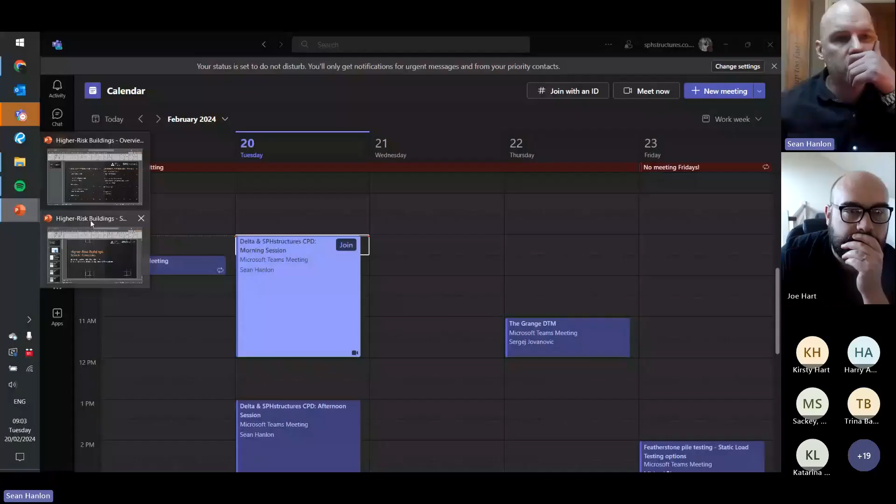So we split the day into two sessions. We have a morning session and an afternoon session. We did this because when we first broached the subject of doing this, and we threw it out on LinkedIn back in January, there were two distinct groups. People wanted to dig into the risk assessment stuff and didn't necessarily need the morning session. So the morning session was aimed at upskilling and knowledge sharing, whereas some of the more experienced engineers might already know the stuff we're going to cover in the morning. So that's where we've come with two sessions.

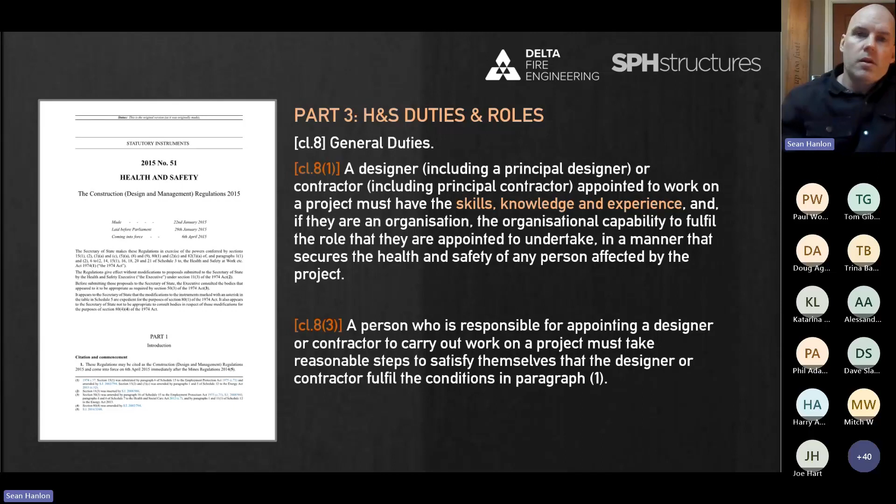Now, I think it's unfair if I sit here and preach about competency without at least suggesting how we do it or how we approach it. So we send out our competency documents, both personal and organisational, as part of each fee proposal that we send out. So when we get a new job in, we look at it and then we go back to the client and say, right, we have looked at your job. This is what we think. Here's the fee for it. And here's our competency that says, this is what we think, this is why we think it, and this is the fee to take it on.

Even if we don't get the job, at least we turn around and say, look, whoever you go to is fine, not a problem, but make sure you're asking for their competency. They should be giving you this information as well. And then this is your responsibility. These are our responsibilities. And at least that way, even if we don't get the job, we've done our best effort. We're pointing in the right direction and we're getting the client to ask the right questions, even if they're not part of the industry.

So in terms of organisational competency, for us, it's predominantly skills and knowledge. Our experience, you can see through the website, our LinkedIn, our Instagram even, and because there's only two of us at SPH Structures, our own personal experience portfolios feed into the SPH competency as well. So we kind of link it in with that.

And then in terms of when we adopt it for the organisational, we're looking at, okay, what is the Engineering Council? Where is their hierarchy? How does that play? What does it take to be chartered? Who's chartered? Is that important? Who are we chartered with? What standards, regulations, design guides apply to us as an organisation? How do we follow them?

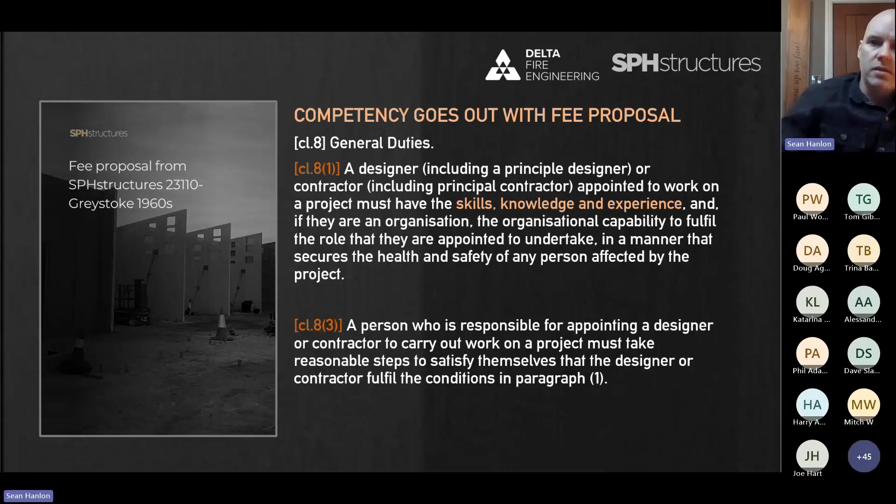And so I'm going to say industry should be doing this. I don't see many examples of this, but the Building Safety Act is now bringing in competency with a vengeance, so to speak. We're all seeing the impact on building surveyors and what they're having to jump through right now, but it does impact designers and contractors as well.

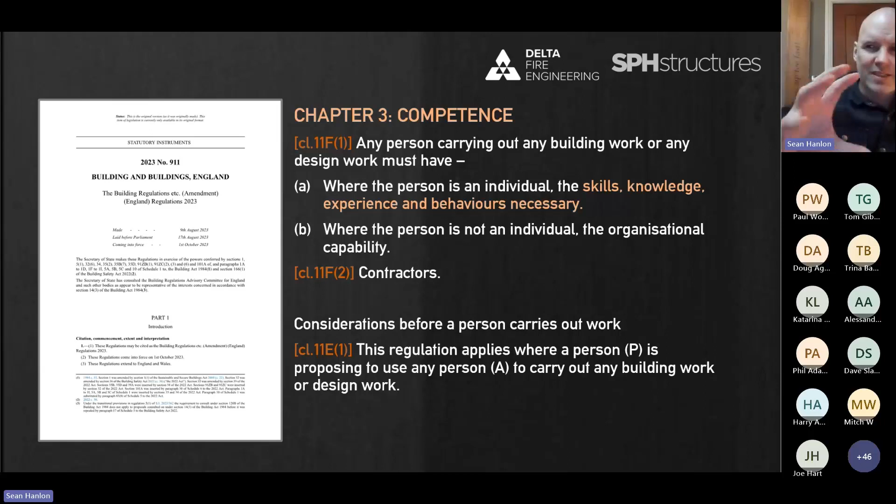Impacts us through secondary legislation. So the changes to the building regulations, which came in on the 1st of October 2023, they've got a whole chapter on competence. And these guys are basically reiterating what the CDM regs already say, with one exception. So clause 11F part 1: any person carrying out any building work or any design work must have, where the person is an individual, skills, knowledge, experience and behaviour necessary. Where the person is not an individual, the organisational capability. Part 2 of that clause is the same but for contractors. So again, that's echoing what the CDM regs already say, with the addition of behaviour.

Now, behaviour, I'm taking to mean following a code of conduct from your institute. So speaking on behalf of, say, the Institution of Structural Engineers, I know within the code of conduct there are clauses in there that say you should be behaving appropriately. You can't be calling out engineers for doing bad work. You have to act appropriately. So I think if you're a member of an institute, you could probably get your behaviours competency ticked via that way. I know RIBA have been training their guys, additional training on the behaviour aspect for this recently, but I don't know how that would look from, say, a contractor or M&E or the fire guys, or what you guys do, or how you're going to negate this additional requirement.

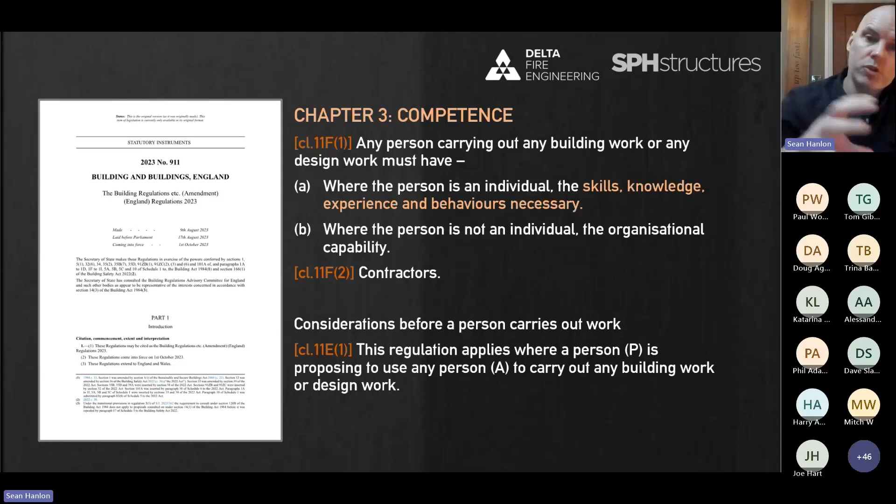And then if you backtrack a little bit into clause 11E of the regs, this regulation applies where a person P is proposing to use any person A to carry out any building work or design work. So that's just reiterating that the client needs to make sure people they're appointing are competent. This bit's new. And this is the bit that I want to discuss later on at the end of play today as well, because I think it opens up a whole can of worms. And this is where designers especially, and anybody else, might get caught out.

Clause 3: the requirements in paragraphs 1 and 2 that we've just spoken about do not apply to an individual T who is in training to fulfil those requirements. The person who asked T to carry out any building work, or as the case may be, any design work, must ensure T is adequately supervised when carrying out the work. Okay, what's in training? So at what point do you start being in training? Is it when you attain chartership? What if you've never attained chartership? What is adequate supervision? Is it one-to-one supervision? Is it one chartered engineer supervising a team of 6 guys?

How does this work where you have 4 or 5 engineers in training around you in a bigger firm, for instance? Should trainees be working on higher risk buildings? Does this raise questions about the ability to check a job? So should it only be competent engineers checking each other's work? And what about if you go between cross consultancies? You're doing Cat 3 checks. How do clients ensure the right people are on the right job? I think this opens up a can of worms, and I think it's going to hit the guys who are competent but not necessarily chartered, because I think chartership will help you in this instance, that you've already demonstrated. For instance, in my personal CPD, my personal competency stuff, I've already shown that I've reached a level in terms of materials, laws, contracts, basic design work, detailed design work, construction appreciation, all these kind of bits. If those guys haven't done the portfolio for that, how's it going to affect those?

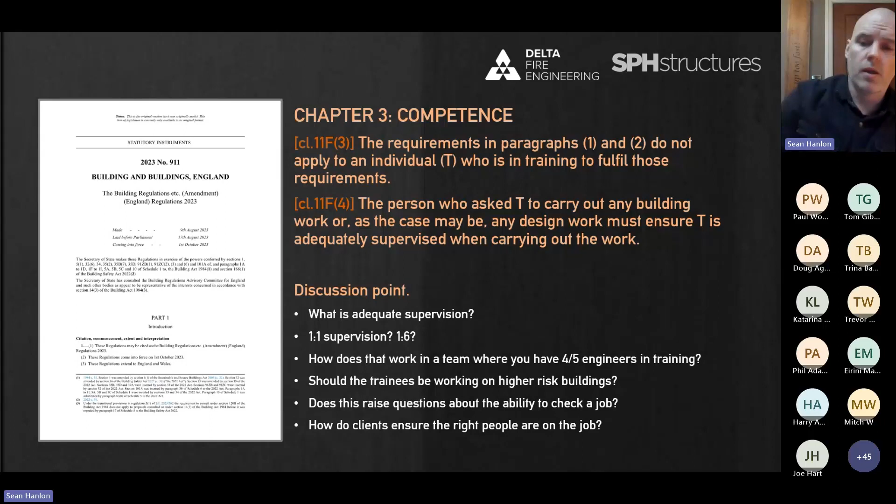So again, I touched on the non-chartered competent engineers and how they're going to achieve this. So who's responsible for this assessment? Is it the clients? Is it the Engineering Council? I know that the Institution of Civil Engineers and the Institution of Structural Engineers, ICE and the IStructE, are combining to produce a joint register. So if you're on that register, you are seen as competent to be able to work on higher risk buildings. I don't know if Fire, M&E and everybody else would be doing a register similar to that. And I don't know if clients are going to demand that as part of working with them on high

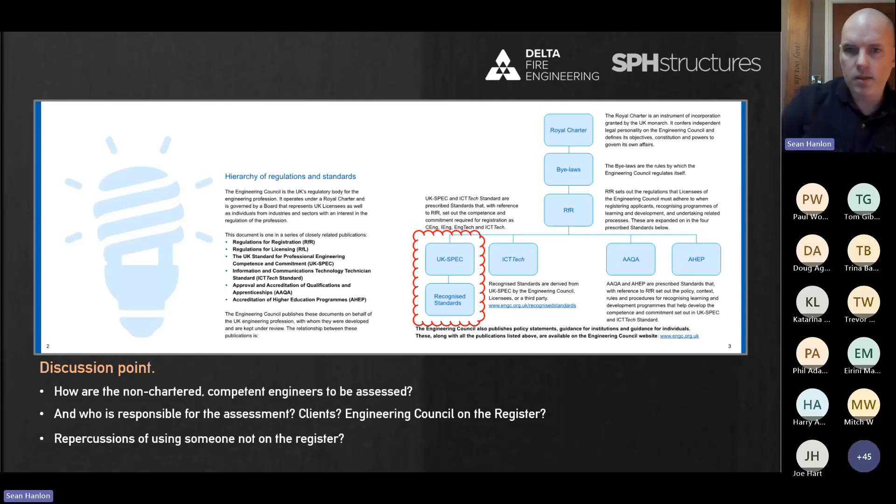risk buildings. Now, I also don't know what the repercussions are of using someone not on the register. I don't know if that's a risk to the client and they take that chance. So maybe the non-chartered competent engineers will be hoping for that clause as well. But I don't know how hard that's going to be enforced. So I think this is opening up a can of worms at the minute, and we need to be careful about how we tread through here.

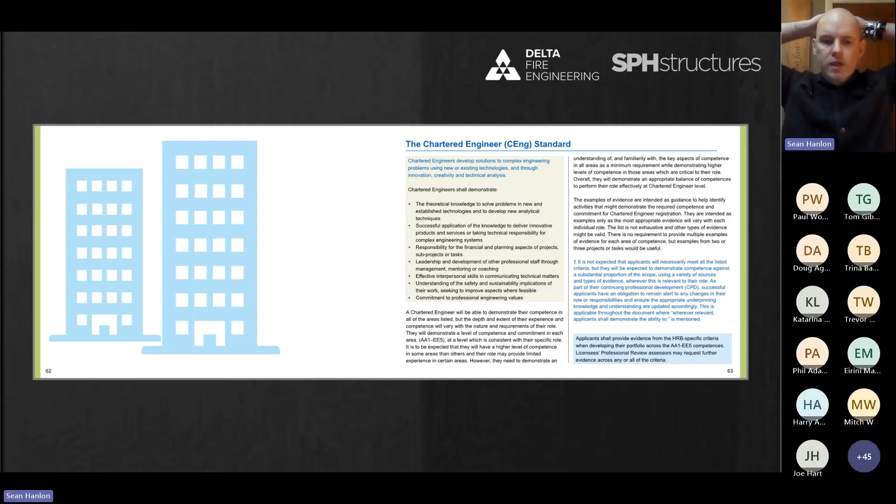Now, when you open the UK-SPEC, there's 3 points that are talking through it. You have the incorporated engineer, the technician, and the chartered engineer. We're going to focus on the chartered engineer today, but each has their own requirements of what we should be demonstrating for the additional work. Now, when you turn the page, you've got 4 sections basically, and these run all the way through the book. So your competence, which on the left here is AA, knowledge and understanding. There will be certain points, normally 1 or 2 points per area. So in this case it's 1 point: maintain, extend, and develop a sound theoretical approach.

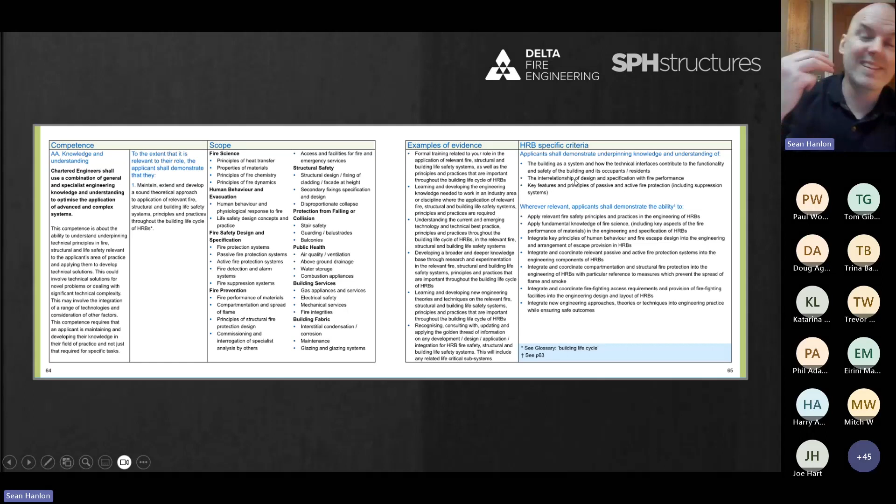A rough scope. And this is every engineer. So this is structural, fire, M&E. We all need an appreciation, a knowledge and understanding of fire science, structural safety, fire prevention, public health, building fabric, building services. And then the HRB specific criteria over here, there's 3 points that we definitely have to demonstrate. There's another 7 points if they apply to you as well. So that's 10 points that we've got to demonstrate that we have competence in. So when you go through the rest of the UK-SPEC, there's 5 areas: knowledge and understanding AA, BB, CC, DD, EE.

When I read this, I think AA is the technical aspects. That's the upskilling. This is the knowledge swap. This is why we're here today. I've got to learn about fire. I've got to learn about structure. And this is what we're learning. And then we go away and we demonstrate this. You might not get everything you need to learn today, but at least it points you in the right direction, gives you an idea of how to pad out your competency, and then you can go from there. B, C, D, and E, I think that's stuff you should already be doing anyway. It's not necessarily technical, and if you're already doing it, it's not too bad. If you're not already doing it, there's quite a lot of work involved.

Now, I was talking to another engineer on this, because I was going to go, right, we're going to focus on AA, and then only talk about AA. But another engineer read this, and his interpretation of it was: is it not similar to the principal designer role, in that we still do our work, but then those who have demonstrated their competency go on the register and they basically sign off and check our work?

And I was like, I don't think so, because it defeats the point. How does the client know if you're competent to do the job in the first place? And I think if you're going that route, it defeats the point of trying to upskill the industry, and it just creates a bespoke checking group within the industry. And I don't think that's the point. So I'm going to elaborate on these points a little bit more, because it has been interpreted that way.

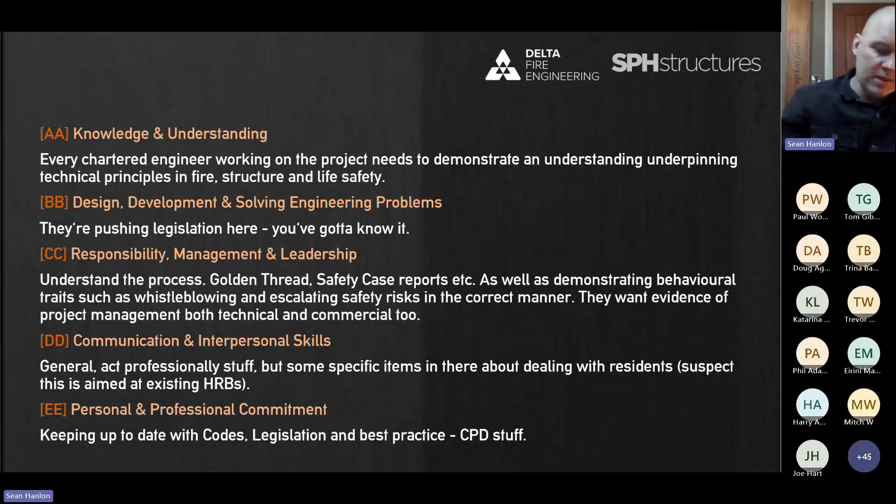I would say that's your CROSS, your Confidential Reporting on Structural Safety, and knowing how to report critical safety aspects, like immediate safety aspects, to the HSE. How do you raise them? If you see something wrong, how do you shut down a site, for instance? They want evidence of project management, both technical and commercial, here too.

Communication and interpersonal skills: general act professionally stuff, but some specific items in there about dealing with residents. I suspect that's aimed at existing HRBs, although they don't specifically state it. And then your personal and professional commitment. You're basically keeping up to date with the codes, legislation, best practice, CPD stuff.

Understand root causes that affect the structure or fire safety of a building. I would say that's your visual condition survey, or if you're doing a new build, it's understanding where the main risks are and what could go wrong. Identify barriers in place. It could be access and all that kind of stuff. And then assess major accident structural safety hazards.

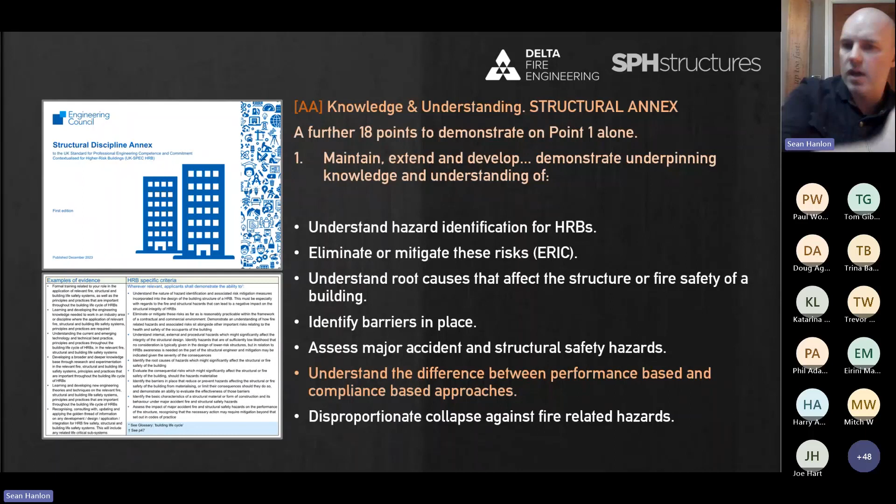This one I've highlighted. Understand the difference between performance-based and compliance-based approaches. They don't come in here and say there's a difference between how you should be approaching new buildings and existing buildings other than this clause. This is the only thing I've seen that alludes to the fact that you have to take one approach to new buildings and one approach to existing buildings. Compliance-based is code compliance. I call it prescriptive. You follow the codes, you do what it says, you get a nice shiny building at the end of it.

Performance-based is you've got to look at how the existing building's working. Some existing buildings don't work to code. They don't even work to their old codes, let alone the new codes. So where are you drawing the line on safety? How are you assessing that building? A lot of engineers make the mistake of trying to shoehorn existing buildings into compliance with new regs, and they don't work. I think that's where you're seeing a lot of the news bulletins at the minute with evacuations around higher risk buildings around the country, because people are panicking and trying to assess old buildings to new codes. And then obviously we've got to look at disproportionate collapse against fire-related hazards as well.

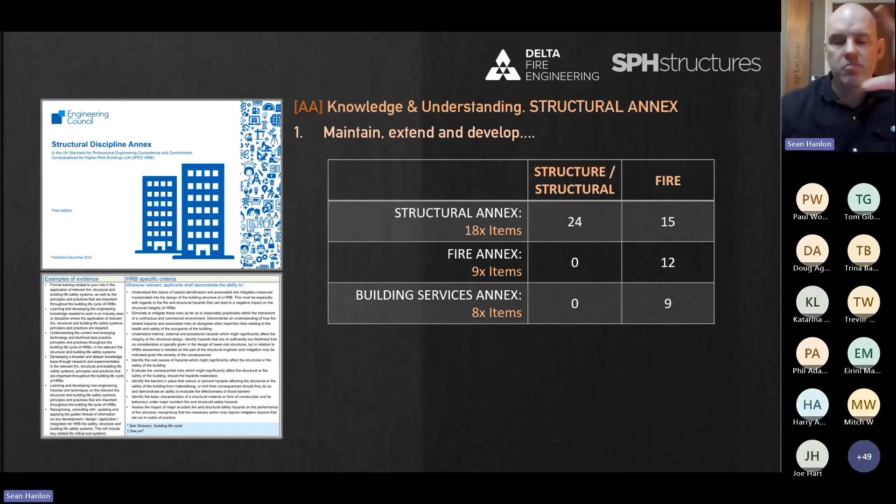Now, on behalf of all the structural engineers out there, I'm having a quick moan, because in the national annexes we have 18 additional points to do. Fire have 9, building services have 8 additional points. Structure or structural are mentioned 24 times within our annex, but it's not repeated through the others. Considering we've got 18 points to pick up, a lot more than the other annexes, why isn't appreciation of structure mentioned in the other annexes, especially for knowledge and understanding? That just seems out of proportion to me. I think that needs changing going forward. But to be honest, I think the UK spec was quite good. I didn't think it really needed these annexes. It's essentially creating a bit more work for us as well.

So going into BB, back into the UK spec, now that you're aware of the annexes and how they feed in as well, BB is the design, development and solving problems. There's 2 points within this that we need to cover. Point 1, which is down here, is just retyped up here: take an active role in the identification and definition of project requirements, problems, opportunities throughout the building lifecycle of HRBs.

That's your specs. That's you doing the job, going through design, development, and everything else. I think you're doing this anyway. I think this is just your job. Most engineers should be doing this as a regular day-to-day occurrence anyway. Now, the scope of what they require here, especially for point 1, they're asking for you to know construction legislation, related guidance.

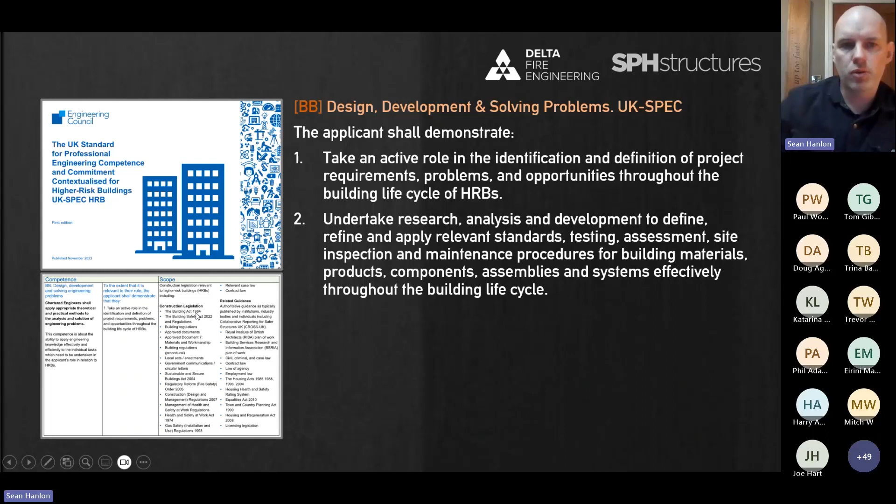Excuse me. Now, in terms of the construction legislation, they want you to know: do you know what the Building Act of 1984 is? Do you know what the Building Safety Act of 2022 is? Do you understand the relationship between acts and regulations? Do you know which building regulations, which approved documents are applicable?

And then in related guidance, they want to know if you know the plan of work, so the RIBA plan of work, Building Services plan of work. I would throw in the IStructE plan of work there as well, because it's different from the RIBA, and it adds an additional work stage between stages 4 and 5 for the structural engineers. So if I'm an architect, if I'm a fire engineer, if I'm building services, do you appreciate what we do there extra before we get on site?

And then for scope 2, they're asking for British and international standards, good practice specifications. I would say that's all your national specifications. So in structure, we have national specifications for timber, steel, concrete, piles and embedded retaining walls, all stuff that we can reference as good practice throughout the industry. And then your maintenance requirements, which you should be raising as part of your CDM regs anyway.

Now, I would say you should know this anyway. People know this. This is how you do your job. It's just demonstrating it. That's the problem. Now, again, as I said at the start, it'd be remiss for me to sit here and preach about competency if I'm not going to share how we do it. So on the left, we have the basis of structural design. This is Eurocode BS EN 1990 or EC0, as it's commonly referred to. And we use this as a checking document.

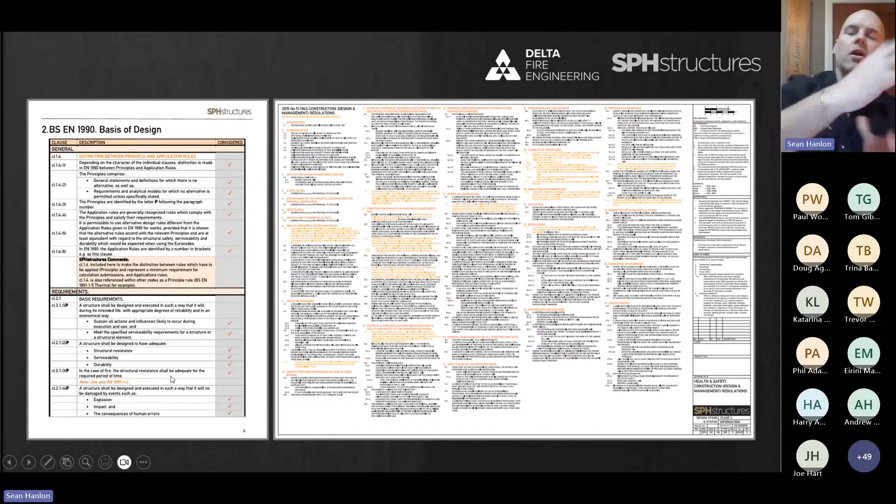So there's a big problem with our industry at the minute with over-reliance on software. People churn through, hit a button, churn numbers, computer says yes, off you go. The problem is not all the principal rules are picked up in those software packages. So if I'm picking up drawings as part of a check, especially if I just get a roll of calculations printed out, I'm there like, okay, have you read the codes? Do you really know what's going in? Have you addressed this principal rule? What about this principle? And when you start looking at all that, it should build your design. It should feed into the design anyway.

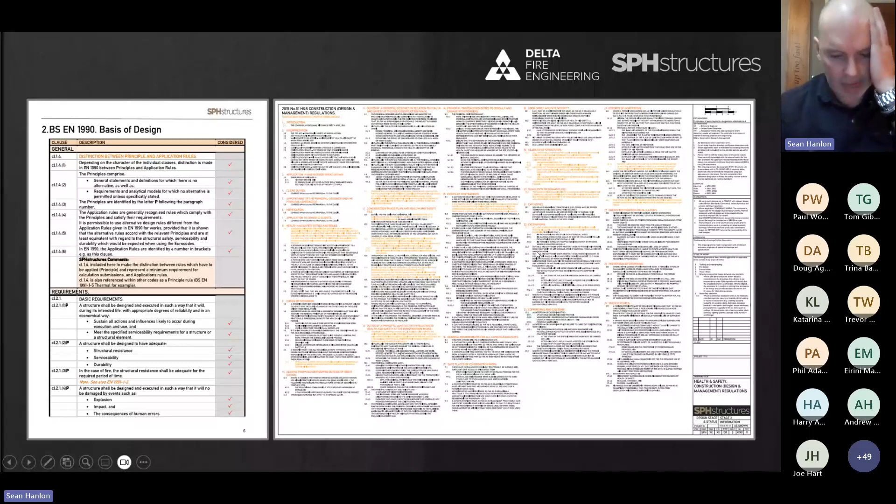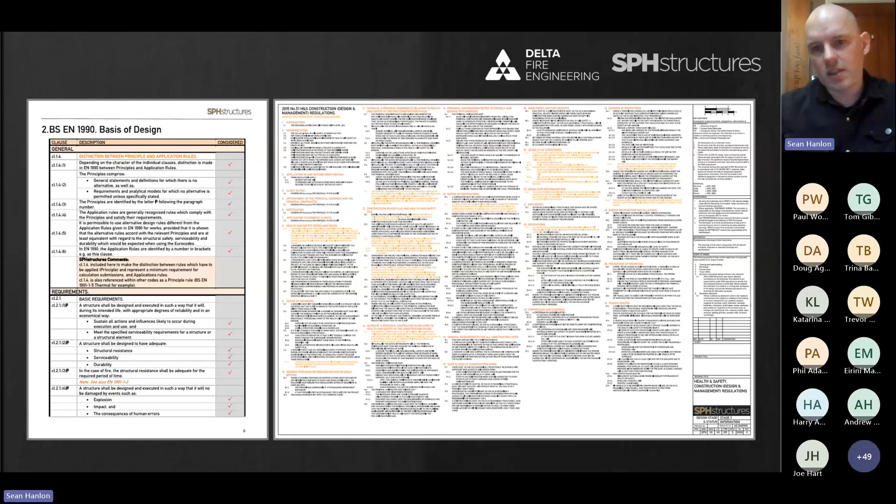And then in terms of the regulations, this is CDM regs. We made a conscious decision a while back that basically anything that we get asked from site or within the design team, especially from site, goes onto our drawings that we issue at site. And one of the biggest arguments we always had, especially with the smaller contractors, was stability of structures, responsibility, temporary works, and contractor design portions, such as steel connection design, timber connection design, and all those elements. They're taken from the national specifications.

But what we did was we typed up the CDM regs. Now this is just 2 pages. This is the first page. And we highlighted bits that are either applicable to ourselves or applicable to contractors. So we say, right, this is our responsibility. Our responsibility as designers is to highlight any design, construction, and maintenance risks in the project. And we do that, and on the second page, we show how we do that. So they're included in our GAs, they're included in our details.

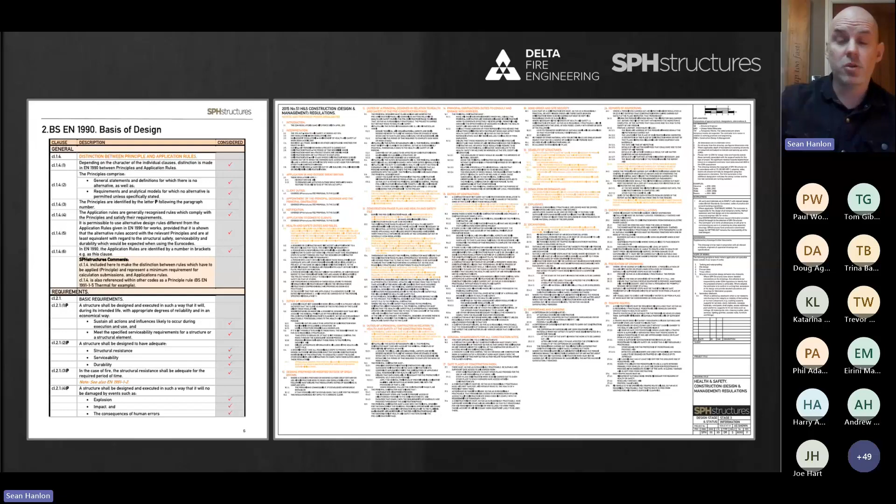And half the time, most of the questions that come back are because they hadn't looked at the drawings. And we found this is a really powerful tool in terms of, no, we're covered here. This is where it says, and it's no longer our opinion, code says this, regs say this. And then we review this. I'd say we probably reread it every 3 to 6 months, just to refresh it, because you can't remember everything, but I know the gist of it. So that's how we demonstrate compliance with legislation, codes, and everything else.

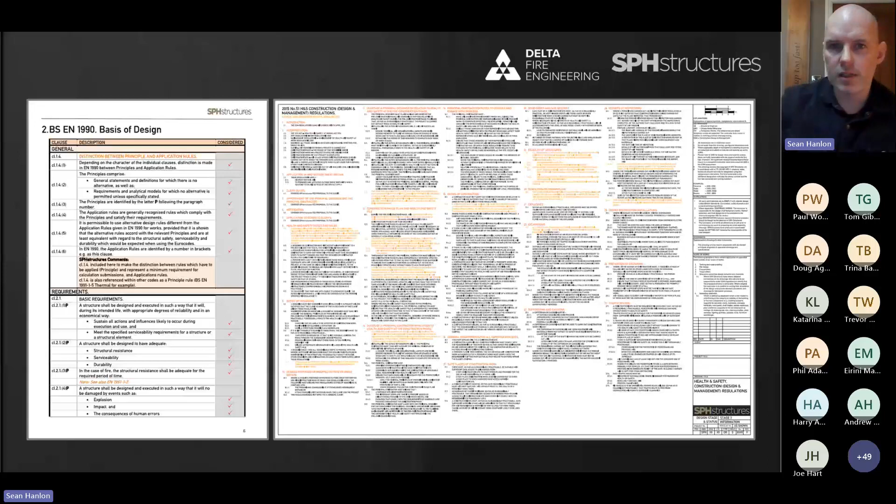Moving on to CC, you're looking at the responsibility management and leadership, the UK spec. So this is understanding the process, golden thread, safety case reports, and the like. The scope for it explains duties of engineering in relation to HRBs, roles and responsibilities of the key duty holders.

I would say I'm having a chat with a lot of clients at the minute, so they fully understand their duties and their responsibilities, and that comes down to communication as well, which we're going to come on to in the other points. And then integrate understanding through life management and maintenance. Again, I think that's really important for existing buildings, and it's almost the first question we're asking when we're appointed on HRBs. And then we've highlighted this bit, which is challenge others where duties are not being met.

I've highlighted it because it almost contradicts code of conduct, especially ours. So we're told that we almost can't call out or challenge. You can challenge engineers, but you can't call them out. And I think that's where the difference is. And just the last point before I move on, competence needs building safety managers. I know it's great. Okay, so it's just reiterating competence throughout everybody who you appoint on the job.

But going back to challenge others where duties are not being met, I think there's, okay, this. RIBA Job Book. This is what architects work to. So if an architect asks us to do more design work or asks us to do certain bits that are typically outside of our scope, I can say, no, that's not our role. It's not within our scope because you haven't issued a responsibility matrix, which you should have done at stage 2. If it's on there, great. We could have priced it. We could have gone through that and we could have worked with that.

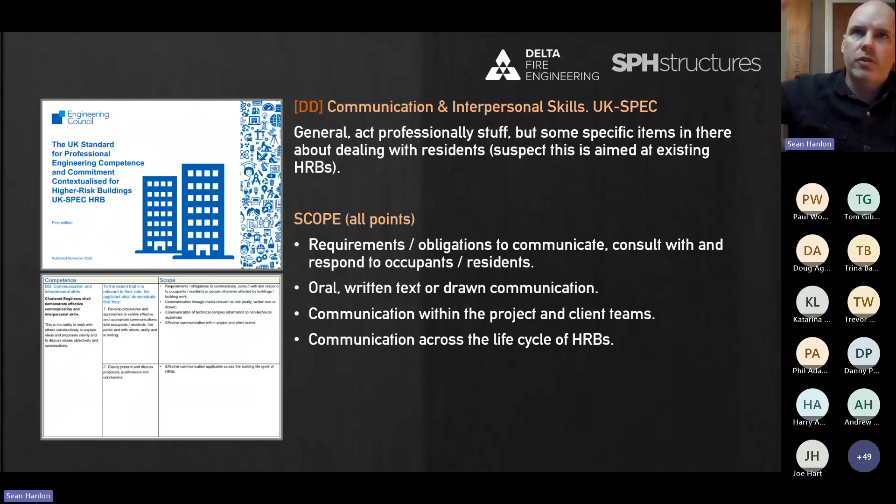I think you've got to be really careful, especially us as structural engineers, to go around and go, your building's at risk of disproportionate collapse, everybody out. Don't get me wrong, if the building is at risk of disproportionate collapse, everybody out, we do it. But it's a big responsibility there, especially when you're dealing with 40, 50, 60, 70, 80 units of people, all their families and where they're going to go.

How you do this, I would say it's more aimed at existing buildings, but how you do that with your clients, whether you do it through a series of webinars or online calls or in person, don't know. I think you need to plan that out before you start engaging with the residents, though. So they're clear about the communication lines, and then you can structure it to see where you go through and raise questions that way. We all do have a duty of care to the residents.

That needs to be reiterated, and then you have to adhere to codes of conduct, which IFE, I'm sure they have their own. M&E, I'm sure they have their own, same as us. And then the legislation guidance that applies to HRBs, there are specific regulations out there. There's 6, for instance, that apply to higher-risk buildings. 3 are more procedural in terms of how to register buildings, how to manage the buildings and everything else. And then 3 of them are quite technical. So it's worth being aware of those.

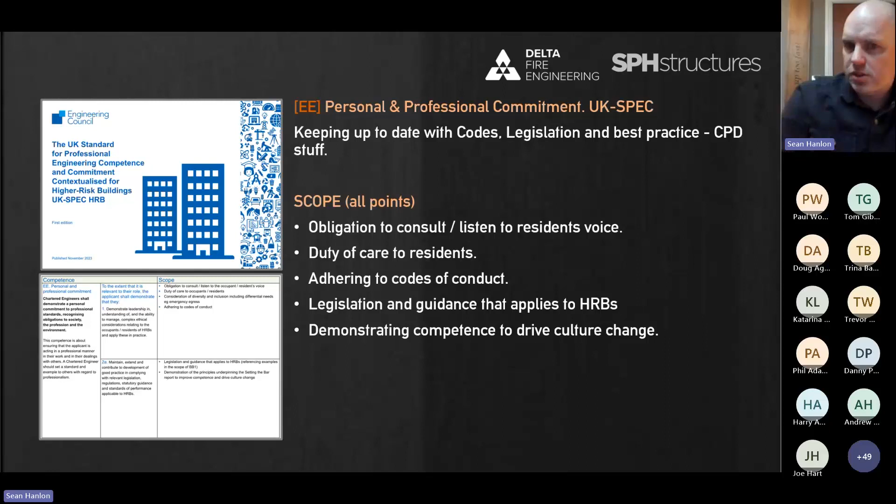And then you've got to demonstrate competence to drive cultural change, which I hope we're doing through this and trying to push the industry in the right direction, sharing info. And then all that is fed back into your competency documents, your personal and your organizational competency. And then our intention is to add AA as an additional page onto our competency documents. So we're already doing B, C, D, and E, and it's seen as building that. So that's where we're from, and this is why we're here today, and this is what we're going to learn from. So I think that should cover it.

Brill. Thank you, Sean. Hope you can hear me again now. Are we back? Yeah. Fantastic. Really good run through. There's been a good stream of chat in the meeting chat, and I've pulled out some questions to give to you, Sean, if that's all right. If anyone has any questions, pop them in the chat as well, and I'll pitch them to him. I think everyone else is muted, aren't they, Sean? So I don't think we can bring people in, but I'll relay questions as they come through. Cool. I was going to plan on doing it for the discussion at the end, but we can play about it now if you want. I think if you right click on whoever it is, more actions, I don't know. I'll figure it out. If anybody wants to come in live, we'll figure it out. Otherwise, I've written down a bunch of questions, Sean, from the chat, so we'll start on those.

Right, okay, so Andrew, starting with a question, and it's one that I really like, because it's one I'm asking myself in my business at the moment about the point you made, Sean, about legal requirements and should we make clients aware of them. So how much of a duty do we have as consultants to tell our clients what their legal responsibility is? And I've added this bit on, do we have a defence if they've not asked us to do something and that's a duty they have, but we've not made them aware of it? Where does that sit currently? I guess it's an opinion-based question, but what do you think on that?

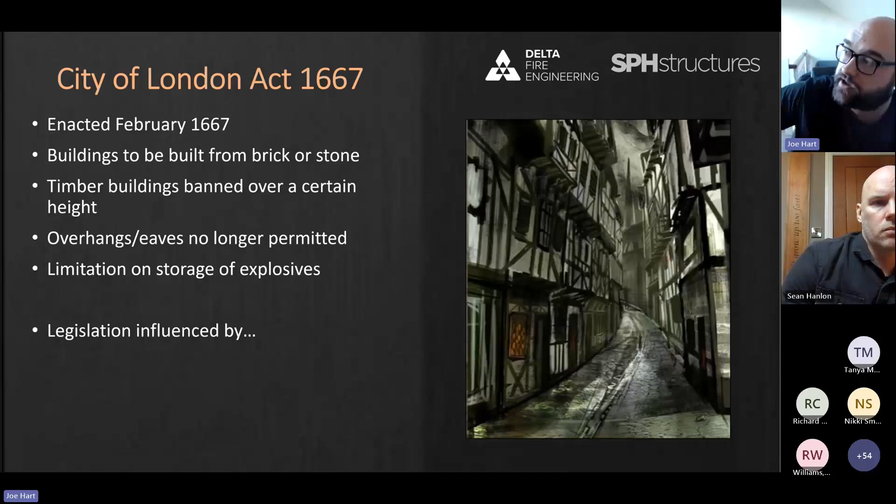And in this case, they were a bit quicker in the 17th century at drafting legislation. Go back 6 months and you get the Great Fire of London. And you can draw the parallels between these two things. The Great Fire of London itself was a mass conflagration, an urban conflagration, so a fire that spread between multiple premises. In fact, it destroyed 3/4 of the ancient city. It spread rapidly between tightly packed buildings that were constructed of timber.

So 6 months later, in this case, we get a piece of legislation that says, okay, because that was an issue, we identify that now as being a root cause. We legislate that out. The Rebuilding the City of London Act says we can no longer do that. And fast forward to more modern times, some of us remember these incidents I'm going to talk about next. We see exactly the same again. If we go back to 1989, we get the subsurface regulations. They apply to subsurface railway stations.

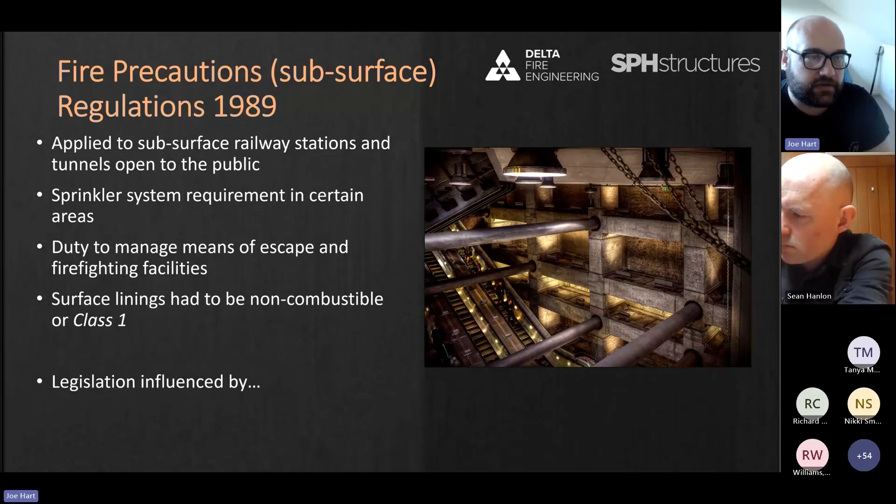And in fact, any tunnel that's open to the public, even pedestrian tunnels, interestingly. We have a requirement to put sprinklers in, which is not something we would have done typically, because sprinklers in underground areas are difficult in terms of pumping water out post-incident and the potential runoffs. A duty to manage means of escape and firefighting facilities in these environments, and surface linings particularly legislated under secondary legislation that they must meet a certain standard.

And again, if we apply my 18-month rule, we go back and we get the King's Cross fire of 1987. Now, I talk about root cause analysis, and I teach that a lot at the university. If you look at the things that are legislated and you look at the incident, you find a direct parallel. So in the King's Cross fire, again, I'm not presenting this as a case study, it's just to highlight a point. It was the surface linings that contributed particularly to flashover occurring in the ticket hall.

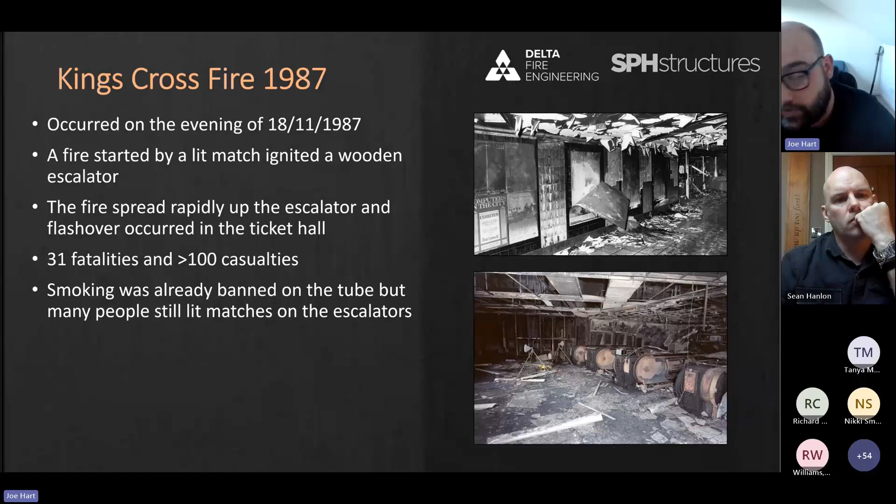These are photographs from the actual incident. So you can see that the surface linings had contributed in terms of propagation along the surface and also combustion of those elements as well. Even the posters in the top right image had ignited. The King's Cross fire itself resulted in 31 fatalities. What we often find is an incident that has a high proportion of fatalities, injuries, or undue loss of property or business or operational continuity. We'll get some investigation into it and often find that we change our rules or guidance.

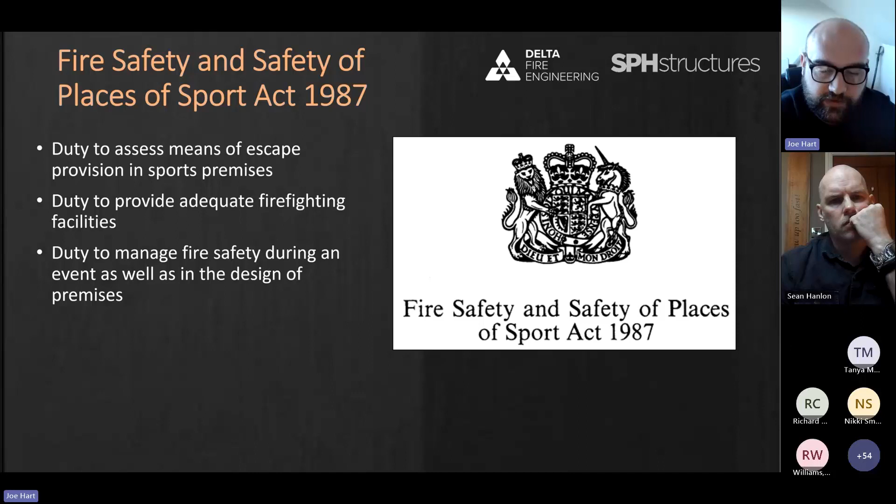Another example, I think slightly earlier, the Fire Safety and Safety of Places of Sport Act 1987. So this brought in an obligation. I was actually teaching a course on this yesterday afternoon at the university. So we had a duty to assess means of escape provision in sports premises. Specifically, what it brings in is a requirement, a legal duty to manage sporting events during the event, not just in the design of the stadia. So a regulation that says once we've designed it and it's occupied, we have to manage it in a particular way. And again, with our 18-month rule, we go back and we find a really significant fire.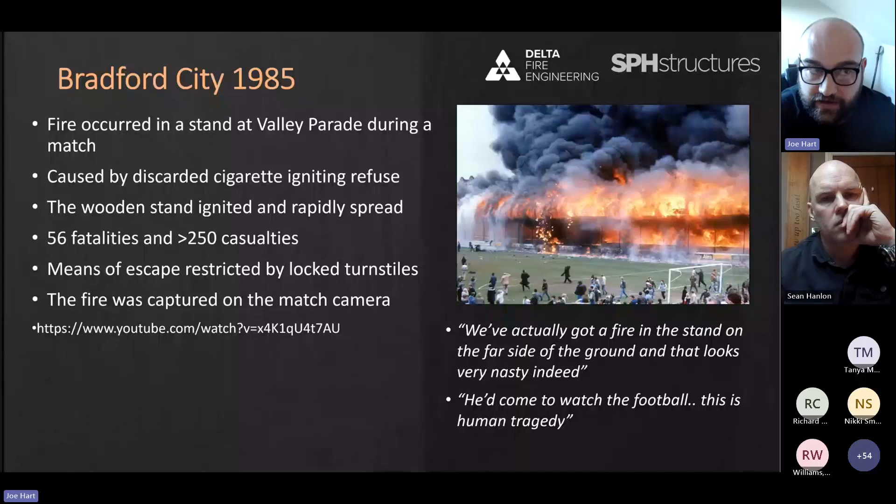And when you look at the fatalities, 56 fatalities in this case, a large proportion of them were as a result of the management during the game rather than the design. What actually happened, and if you read the report into it, a major contributory factor to the number of fatalities was the locking of turnstiles at half-time or after the game had started, because there was an issue with people coming in without tickets. So the duty for management is something I talk about a lot throughout today, as well as duty of design. And again, this fits with our 18-month rule from incident through to legislation or guidance.

The last point on this before I come to where we are currently in industry in terms of fire. We see this also in fire. We look retrospectively at data over time, statistics over time. It's a very analytical field, I find. Certainly when we're writing guidance and writing legislation, we look for major incidents and trends. And anyone who's seen my lectures before will be familiar with these next couple of slides, but it's an example I like because it highlights the point really well. And it brings in some of our instances of fire, so some of our risk that we're looking at.

If we look at the graph on screen, we've got the number of fatalities in fires from 1981 up to almost the present day, 2020. And this graph shows the proportion of fatalities in dwelling fires versus other fires, and the Grenfell Tower fire is in there as a standalone data point as well. But what we see, and I'm not a data analyst, I do this for the purposes of engineering, but to my untrained eye, I can see that the graph is going down. So from 1981, we had around 750 fatalities per year, and up to almost the present day, what are we, 250.

So we've reduced down there to a third of where it was. And this is the sort of data that's used in the drafting of our guidance and legislation and in our risk-based approaches to say, well, this is a positive trend. We've seen a decrease, whilst interestingly saying that the proportion of dwelling fire fatalities is broadly the same across. You would say perhaps 80%, 85% of fatalities occur in dwellings rather than other fires, but generally a downward trend.

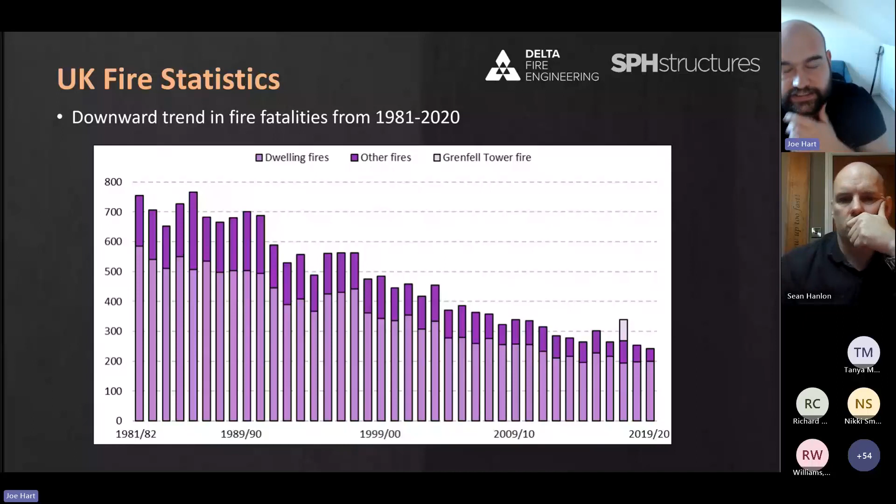And related into this as well is things to do with funding for fire services and funding for general fire precautions work, and whether we need to draft guidance, etc. So you look at this and see a positive trend.

But over time, this is a slightly wider version of the same graph. You see 1981, we had 750 fatalities, slightly more in here because it goes beyond the fire, so forget about the blue at the top. You see that actually that 1981 statistic was just the top of a bell curve. And actually from the 1950s up to the 1980s, there had been this huge increase in fatalities in the UK.

And it's this sort of work that's really intrinsic to fire. When we're talking not just about designing a school or writing a fire strategy or doing something, but on the wider perspective, which is where we're working here in the Building Safety Act, we're looking at wider trends in fire engineering. It's where I spend a lot of my time. We look at the wider industry, and it's this sort of analysis that's really useful.

If we look at what's happened from 1981 to 2020-ish, slightly different data set, downward trend. But actually there is just an upward trend from the 1950s. And this is a really interesting area of fire safety for me, this analysis of how effective we're being. Because what happened in the 1950s, we know why this happened.

If we look at the colour bars, we can see, again, proportions of the data. So the burns didn't really change, so fatalities as a result of direct heat exposure. But what's driving the trend is overcome by gas, smoke and toxic fumes. It was toxicity that was driving this increase in fatalities from 1950s up to 1980s.

And when I teach this in the classroom, I say, does anyone know what this is? And I can't do that today, but generally this is quite well accepted and understood within fire, not so much outside of, but it is an interesting little statistic. What it was that was driving this change in fatalities was, in fact, the types of materials we had in buildings, internal to buildings, not in the structure itself.

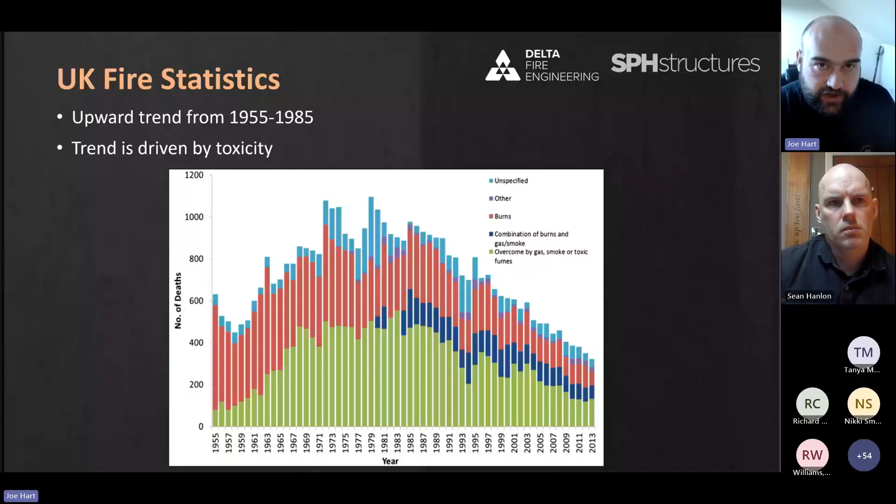So from the 1950s onwards, we started to use more synthetic materials, foam, mattresses, polyurethane, different materials we were putting into people's homes. And that drove over a 30-year period or 25-year period, a huge increase in toxicity. And what we did, bringing it to where we are now in terms of legislation and guidance, is in 1980, this was identified and we started to test upholstered furniture. We brought in the upholstered furniture safety regulations.

If you go now to get rid of a sofa at a charity shop, you can't do it without one of those labels on it. You have to demonstrate it's been tested to the standards that were brought in as a result of that wider industry change. So nowadays we put fire labels on things to say that post 1980 we've tested it accordingly, and if we can't demonstrate we have that, it can't be used in buildings or we can't market that product.

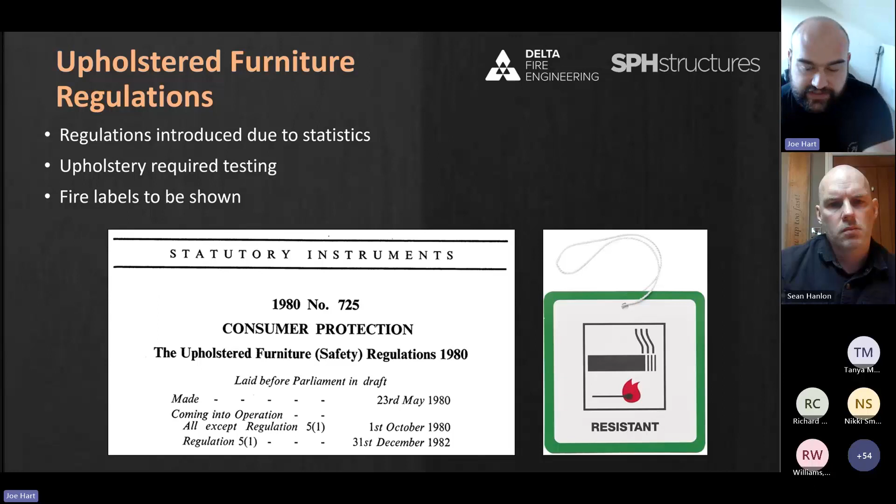And again, just an interesting statistic to pull out, we actually have an updated version in 1988 of that particular regulation. And if you read it, it says there is a specific exemption for something that's pre-1950, which is the date at which we saw this increase in toxicity occur.

So that's a bit of a brief run through to start with some history of fire. The key salient point I want to make there, before I come on to the next one, is that fire safety is beyond what we see in buildings. It's not simply the kind of detector you see in your home or the extinguisher you see when you go down the pub or you walk into a shop and you see a fire exit sign.

There are wider kind of industry trends that we look at and also wider consequences of real incidents. We spend a lot of time, certainly I spend a lot of time reading into case studies, looking at fires that are happening now when they make the news.

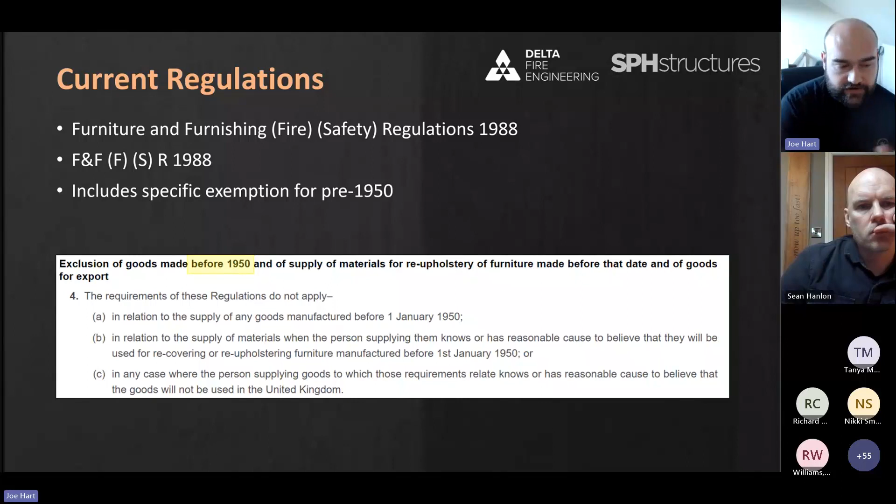I research in a lot of detail if I can. I look into the design of the building and what perhaps led to it, and also historic. There's a huge element of our industry that is looking historically at what's occurred. And where we get to today, of course, we've looked at the competency already with Sean this morning. Throughout today, we're going to get a little bit more.

The Building Safety Act is no different. We know, hopefully, the Building Safety Act has come in following the fire at Grenfell Tower. It was enacted, and now all the secondary legislation we have and continue to get is as a direct result of that incident and the trends that have occurred over time. That trend doesn't have to be plotted on a graph. It can be anecdotal, cultural shifts. Everything we've seen in the industry over the past, well, decades, frankly, is now seeking to be undone by the Building Safety Act and change the regimes that we have.

The Building Safety Act itself is changing the way that buildings are designed, reviewed and managed for fire safety. It's a really interesting point. It's not simply the design. There was a question this morning that I didn't quite get to about, are we looking at the design of buildings or existing buildings? And one thing with the Building Safety Act is it transcends both. It has changed the regime we have both for new builds and also existing buildings that we're reviewing. Other things it has done is establish the Building Safety Regulator, changed our regulatory regime.

And I suppose one of the salient points we've touched on so far is that it has sharpened focus on competency. So those working in fire safety, the Hackitt review, when we read, and the Raising the Bar reports and Setting the Bar reports, very, very much focused on who's making decisions, what are their competency, who should be making decisions, and how do we document all those things with the golden thread of information.

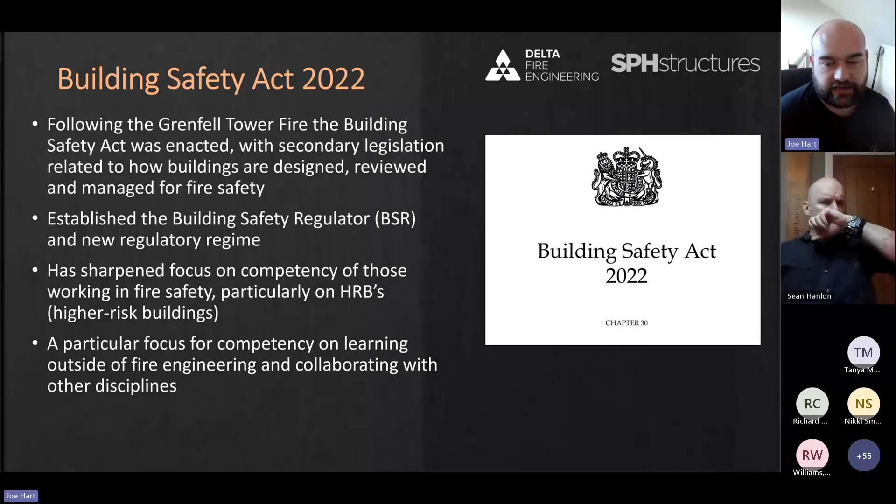So one other focus, and this is why Sean and I are here doing this. Really, the reason we're doing this and the reason it's free and we're giving it out to everyone is this is Sean and I swapping notes. But we think that the fact we need to swap notes, being in the positions that we're at, suggests other people want to do the same as well. And it's great that so many people have dialed in to do the same. This is a note swap exercise. This is just us sharing what we know so we can all learn from each other. Because particular focus, post-Building Safety Act and post-Grenfell certainly, is about learning from other disciplines and sharing what we know and learning from everyone else around, collaborating on projects and collaborating in wider industry.

So to come on to what we actually do then in terms of fire engineering, this is just finalising the point there about the history of regs. So legislation is often influenced by our historic events. That's not unique to fire. It's so prevalent in fire though. Go back 18 months from the regulation and find the fire. It's a game that you can play. It holds so well with everything that we find. Any incident unprecedented in terms of scale, damage or loss of life will often draw scrutiny of the regulations. How was it that this thing was allowed to be constructed? How was it that people were put at that undue risk, and why did that incident occur? That will often bring in change in legislation.

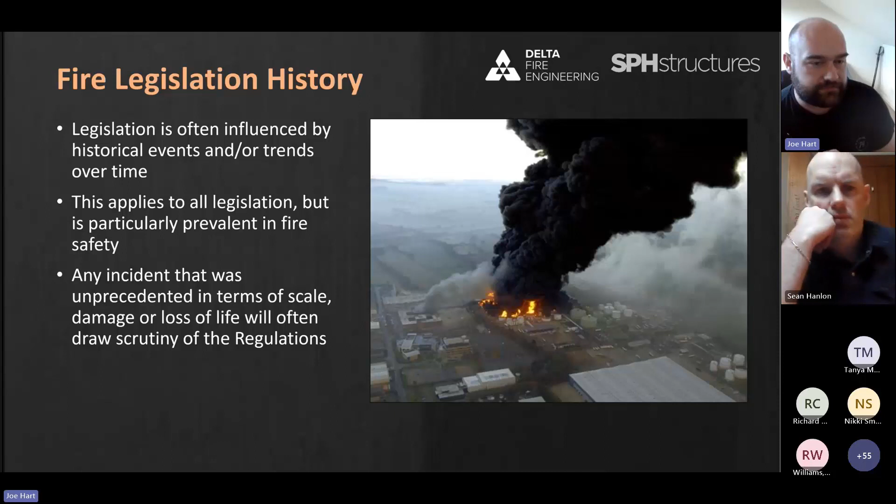So bringing us to where we are, I wrote these slides after having read Sean's, and I quite liked the way that it was presented, simply going through what we do day to day that I take for granted in terms of what rules am I bound by and what do I look at when I'm designing those particular buildings. So we are familiar, I presume, with the building regulations, the vast majority of us. Perhaps not, though. I know I've got some folks dialed in who want to learn about fire engineering who work in other fire industries.

There's a point I want to make very briefly that actually I've very recently, in fact, stopped calling it the fire industry, because something that I've learned now that I'm in my position holding multiple roles, I've realized that actually I work in lots of different fire industries. I work in the fire engineering industry, academic, which is itself an industry, but I'm also in the fire risk assessment industry, the fire construction industry. Each of those are very different. They operate in different ways.

And I've only really realized that literally in the last 6 weeks. I've had a bit of a light bulb moment that I now refer to the fire sector. So within the fire sector, we have all of these disciplines working together and multiple industries. The fire engineering industry here, we're looking principally at our building regulations. So in terms of functional requirements, we have 5. Part B. Part A, of course, is you guys over in structure. We're Part B. We're right on your coattails in Schedule 1.

We have 5 functional requirements, and they work the exact same as any of the rest of our functional building regs. It doesn't tell us exactly what we need to do. It gives us a function. It gives us a definition of what we need to achieve, and it's for us to design. There is a slight difference we have now with Regulation 7, of course. We now have a legal duty for cladding of high-rise buildings. But broadly, for what we're talking about at this stage for an introduction, it is the functional requirements B1 through B5.

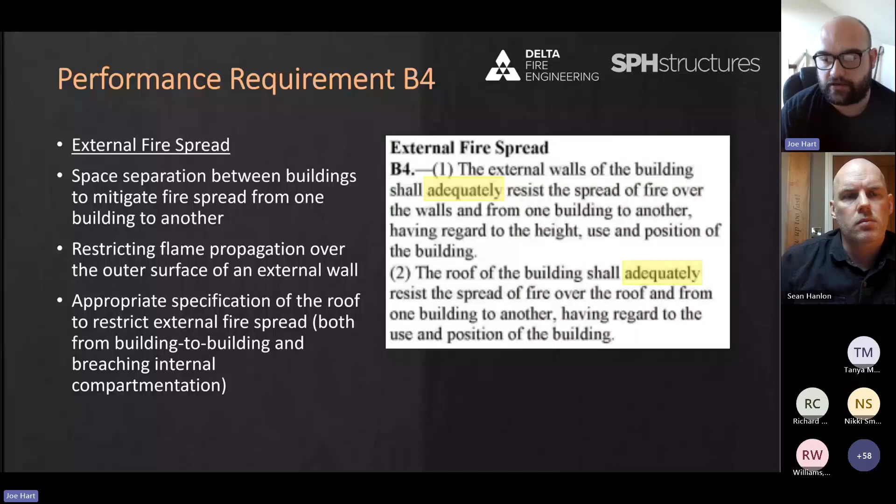First of all, it's a fire breaking out from the building, spreading over the roof and breaking back in. But secondly, it's an external fire source hitting the roof and breaking down into the building as well. Multifaceted, the external fire spread for both walls and roofs. Big part of any fire strategy we're looking at, certainly these days.

And then finally, performance requirement B5. So the access and the facilities for the fire service. We have the legal duty, we have the functional requirement in two parts again. The building should be designed and constructed to provide reasonable facilities to assist firefighters in the protection of life. And reasonable provision should be made within the site of the building to enable fire appliances to gain access.

So things we might be putting into a building, we would be looking at access to the building. We look at the access roads. What's the width of those roads? Can you get a fire appliance down there? If you're driving a fire appliance down, is it just a typical fire tender? Is it a water carrier? Is it a high reach appliance? Is it a special appliance? Is it just a pump? Is there sufficient holding capacity, waiting capacity for multiple appliances?

If we had a make pumps 10, we've got 10 fire appliances on site, is there sufficient space for them to be? Do we have access beyond where the building site is, but where's the nearest fire hydrant? Is it within 90 meters of the site? Do we have access to water? We look far beyond the building itself when we consider regulation B5.

As well as the reasonable facilities once we've accessed sites, so we're writing the operational firefighting strategy to say once we get up to the building, what do we do once we get there? Do we commit firefighters to the building? We always design on the basis of we've put sufficient things in place that we could effect firefighting operations, because what we're doing under B5 Part 1 is providing reasonable facilities to assist firefighters.

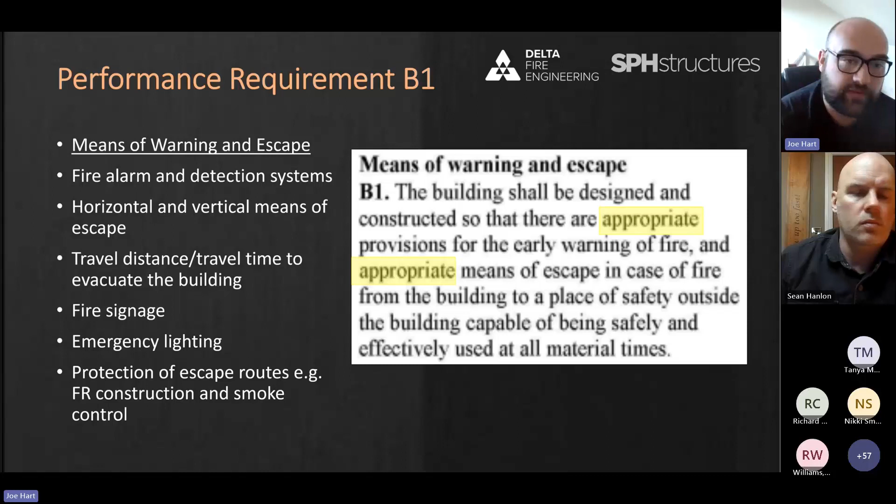All of these, if I skim back, I'm going to take the opportunity to just go back to them super quick and highlight them again. Huge consideration both in existing and new builds. So in a new build, we have guidance for each of these things. We have our British standards, as we'd have in any discipline, that tell us minimum category of alarm, how far apart detectors should be. Similarly, for internal fire spread linings, we've got guidance on what type of room, the risk of that room, and what we should be building in.

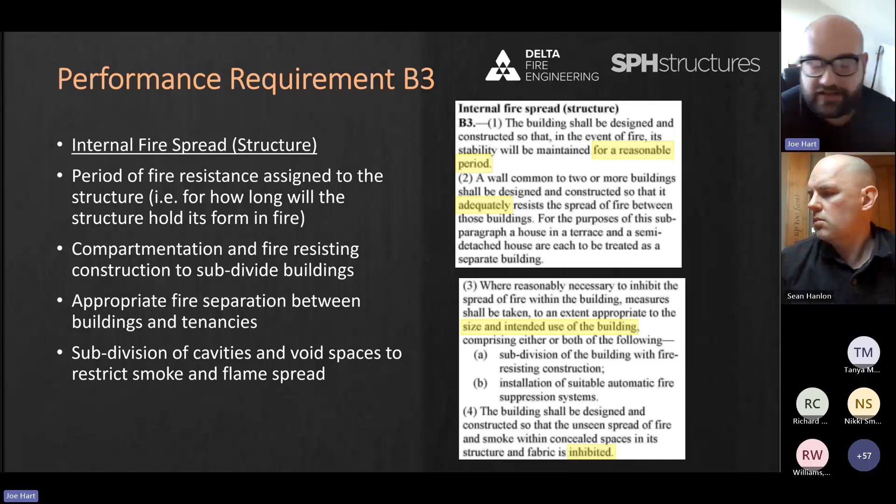We can calculate the required element of structure, period of fire resistance, based on the reasonable worst case fire size. We can look to guidance again for a new build and spray intumescent paint on the beams if we choose to. External fire spread, we can classify what cladding we need, and we can decide what we're going to put in the building for fire service, and we can widen roads while we're building it.

Big challenge for us, and certainly in what Sean and I look at very frequently, is in existing buildings. We're looking at what is currently in place for these things. We're benchmarking against guidance, but we're looking at reasonably, do we have appropriate means of escape? Would the fire service be able to, again, reasonably use facilities in the event of operational firefighting, and do they have reasonable provision in the site to access and move around?

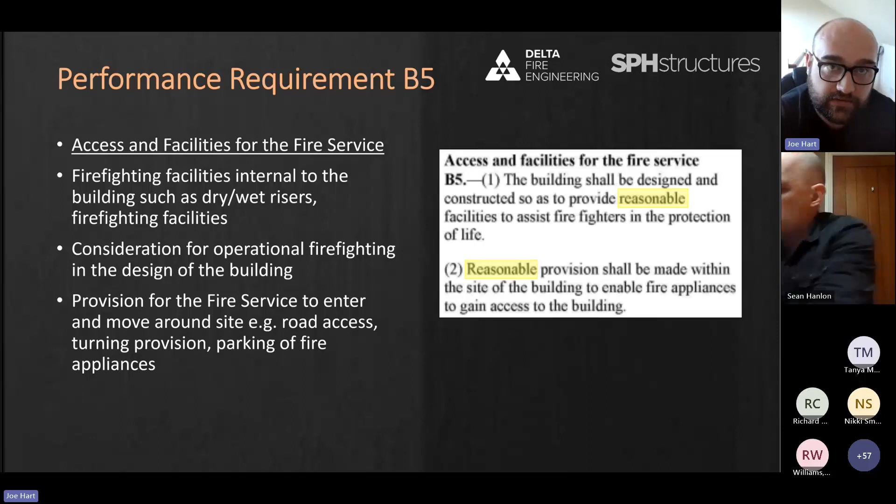One quick note I want to make, it's actually one of my final notes. I'm looking at the watch. I've gone through pretty quick. I think I started a few minutes early, didn't I?

But one point I always make about fire, and I highlight this point as one reason I enjoy working in fire so much, because I love what I do. And one of the reasons for that is the building life cycle, and particularly the fact that fire safety is involved throughout the building life cycle. The building life cycle is hopefully something that's familiar to most of us. If it isn't, I'll do it super quick.

If we take any building or piece of land and we consider it throughout its life, it will go through an element of being designed. It will be constructed, so we'll have a construction phase. It will be occupied, and then it will be demolished or renovated, at which point it goes back to the design stage again. And we talk about the building life cycle an awful lot in industry and in academia and every piece of work that I do. And I always like to highlight the point that fire safety never leaves the building life cycle.

During the design, we have a huge part to play in what goes into that building to ensure fire safety. The 5 functional requirements we just discussed are 5 of them. We design the building to comply with relevant codes and standards. We design performance-based solutions in there to ensure that the building is safe insofar as it reasonably can be.

During construction, and again, I gave a lecture yesterday about this at the university about construction site fire safety, and one of the teams we have at Delta actually is specifically construction based, going out to construction sites, checking that, first of all, construction sites are themselves inherently risky, so mitigating that through risk assessment, but also the features we have designed in at design stage, making sure that they're being installed or implemented, as we call it, correctly.

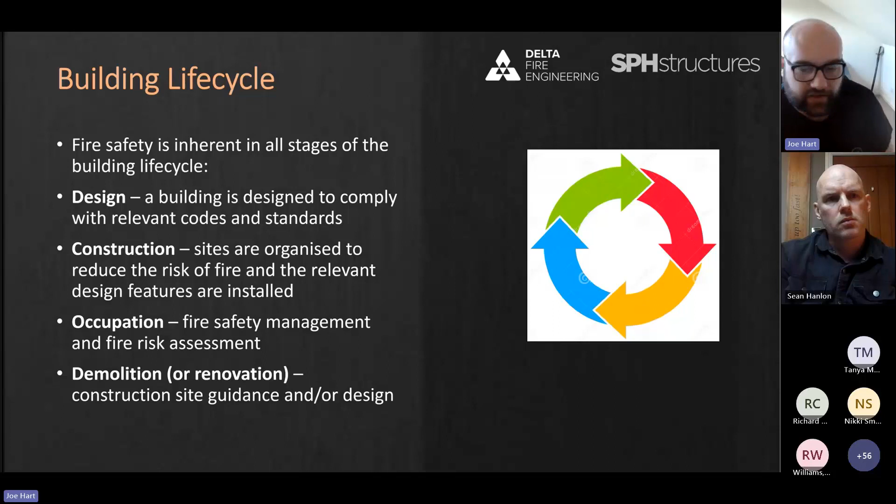I was looking at something over the weekend, actually. Somebody has opened up a floor, commercial unit, ground floor, resi above, opened up the floor, realised it's got timber inside there that wasn't in the drawings. So during the construction, they've identified a new fire safety risk for us to now consider in our fire strategy. How do we protect that? So a point I like to end on, actually, about the building life cycle and how fire is involved throughout each of those stages.

To summarise then, very much fire engineering 101, the quickest run through you could possibly do. And I somehow came in under time as well, remarkably. Fire engineering, going back to my first spider diagram, is this multidisciplinary field. It's a multidisciplinary approach, drawing on all the sciences, understanding of building design, psychology of people in buildings, how do humans behave, all those different disciplines coming together, seeking to reduce the likelihood and the severity of fires. We have to look holistically.

If we look at one floor of a building, and again, I had this, let's not call it an argument, but it was an argument about, can you write a fire strategy for one floor of a building? I said, yes, we can. But I also need to understand everything else that's happening. Because if there's a fire on that floor and everybody evacuates, where do they go? What's the consequential impact once they enter the stair and people evacuate? So holistic is a very important word for us in fire engineering.

And then to finish there, it is both a scientific and an engineering discipline. So we are involved in the design and also the primary sciences that underpin all of the design work, as well as increasingly a legal and a regulatory field. 4 years ago, I didn't think I'd be a law lecturer, but I now teach law at a university, and that's because I have to know it for fire engineering.

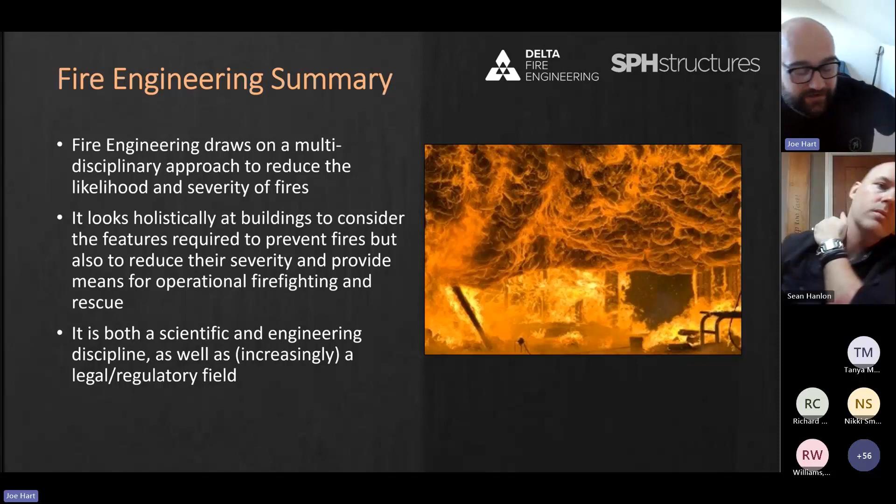And again, I think that might be my last slide, but going back to the points we had earlier about whether we have to understand the secondary legislation and should we make clients aware. My opinion on that is we have a duty as competent engineers to understand the frameworks that we work within. We do have to understand these days all of the legal requirements we have. And I'm actually really grateful for the fact I teach law, because it forces me to be at the forefront of it and understand those requirements. So I'm weirdly grateful for that role that I've got.

So Sean, I trust everyone's now an expert and there were no further questions, but I'll refer back to you and you can throw some at me if on the off chance there were.

Thanks, man. Yeah, that was really good. I got a sense of a bigger picture. I don't know about anybody else. I know bits of stuff. So sometimes I know a bit of the structure, I know a bit of linings, but seeing the whole bigger picture and how it comes in made more sense. And then obviously for me it raised loads more questions.

Trevor wants to know, just first and foremost, because you seem to be in close proximity to Grenfell and now living near Bolton, he thinks you're a fire risk on its own, so he wants to stay well away from you and needs to know where you are in the country. So stick away from the northwest, Trev, you'll be fine.

Yeah. And then Piotr, I hope I'm pronouncing that right. Do me a favour, raise your hand. I'll see if I can turn your mic on, turn your video on, because Piotr was the only other guy who came in with a few questions, and I think it'd be easy just to get you involved there. Sure. I've got a few, if that's all right, going through.

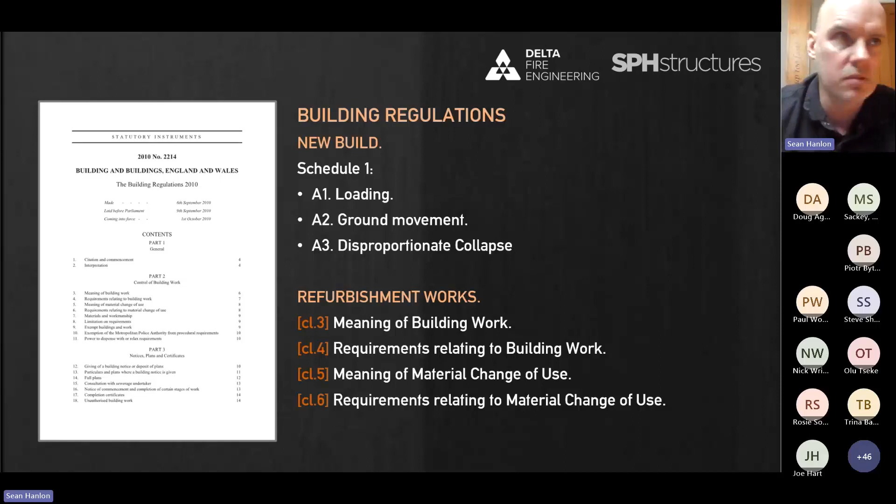When you read through the rest of the building regulations, you have clauses 3, 4, 5, and 6 that relate to building work and material change of use. I'm going to call those refurbishment works or refurb works. They're for existing buildings, but they basically push you back to Schedule 1 and say, look, comply with this where you can, depending on the form, structure, and consequences of the building. So that's kind of what we work through, and I'm going to work my way through those.

So A1 loading: the building shall be constructed so that the combined dead, imposed, and wind loads are sustained and transmitted by it to the ground, A, safely, and B, without causing such deflection or deformation of any part of the building or such movement of the ground as will impair the stability of any part of another building. I don't know if you guys are the same as me, but sometimes you've got to reread this stuff twice just to get it through.

Basically, part A, to do it safely, we call that ultimate limit states. That's our set level of safety, whether it's bending, compression, tension, however it's working, this is the ultimate limit state. It's got to work. We're not allowed past that breaking point, so to speak. So we call that ultimate limit state. And then the bit about deflection, deformation, we call these serviceability limit states, SLS for short.

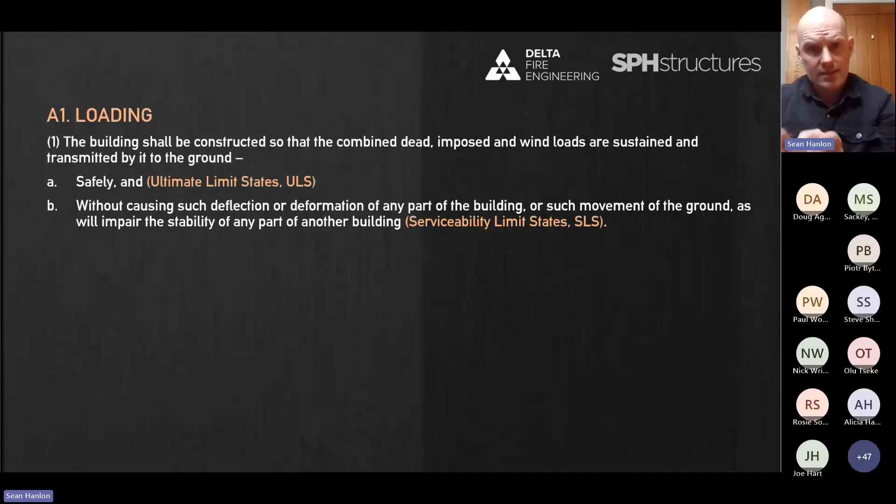Now, if you're at home or at work right now, you're sat on floors, walls, roofs around you. Your floors can only deflect or sag a certain amount before the plasterboard beneath them starts cracking, or before they become bouncy when you walk across.

And as humans, we're very susceptible to vibrations in floors, for instance. So vibration and deflection, there's serviceability. Most of the time in new building, I would say it's your SLS limit states, how stiff something is, how much it moves. This is what we design to these days. So this is what dictates new build design, not the ultimate limit. You could build a building safely, but it might move, it might crack; it will still be safe.

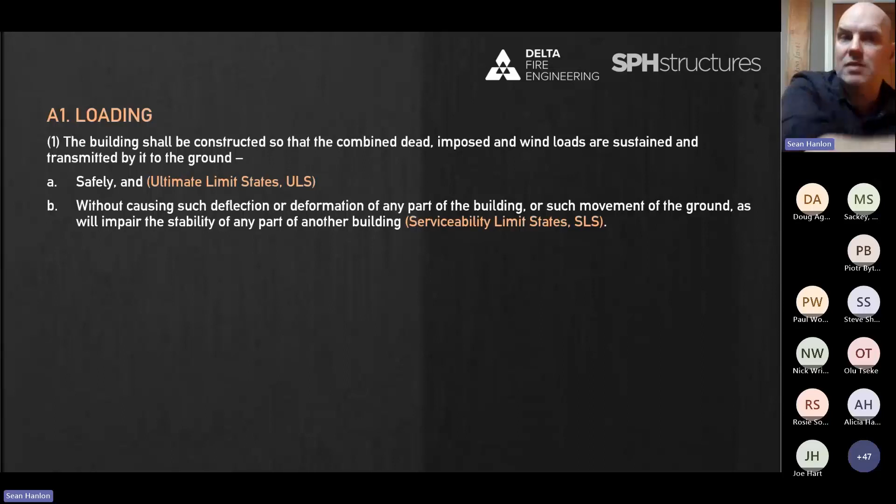Serviceability is what we design new to, and there's an important differentiation there to understand between the two, because that's what we work to most of the time. So ultimate limit states are with a factor of safety on, and then serviceability limit states are basically everything that's scrapped off. This is as it's working in its natural state, so to speak. And that's how we apply the two conditions.

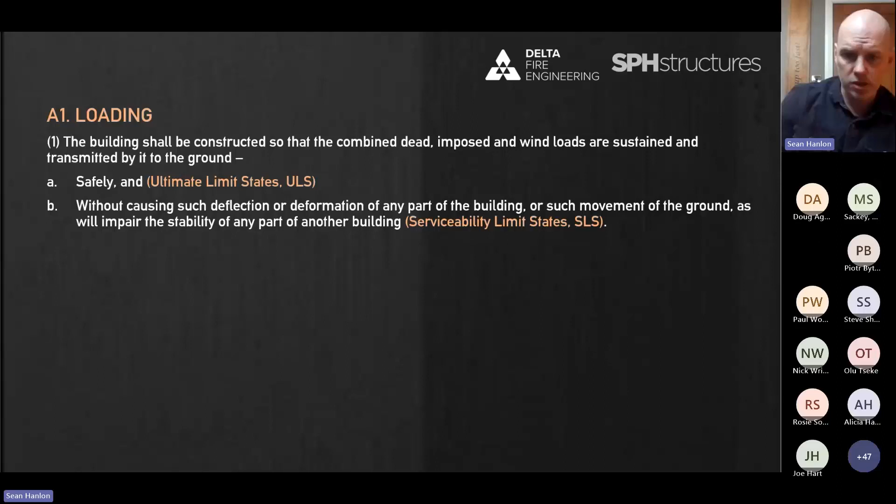Imposed loads are live loads. Anything acting externally on the structure that is variable, basically. So a snow load is an imposed load. A wind load is an imposed load. People walking around a building is an imposed load, and we have set values on that we take from codes and everything else.

Where we have a break in the load path, that's where we need to add a beam or a transfer structure or a podium, it's sometimes called, depending on the form of construction. And it's these little tweaks that we have to pick up, move the load around. We basically chase the load all the way down the structure. And in a nutshell, that's what we do. But we do loads of calculations to make sure everything bends, moves, compresses, stretches as much as it needs to.

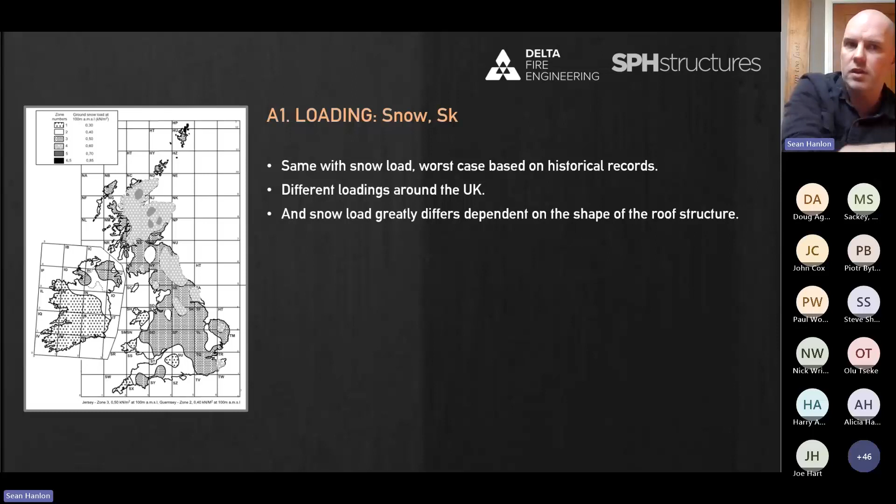And then they'd come to me and go, okay, give us the snowdrift calcs. And I was there like, I don't know what you mean. And that triggered my learning process into all this. But I learned loads from the truss guys in terms of how they frame roofs, how they approach it, the different forces involved and everything like. And it's a real art if you can do it well. So dead loads.

Now, I'm going to skip about 18 years of experience and tell you it comes with the numbers. Okay, my first boss used to call this get a feel for it. You'll get a feel for the numbers. You will know that a timber joist floor can span 4.5 meters as a stair trimmer. When you go up to 5 meters, it's glulam. When you go to 5.5 meters, that's a steel. I know that because I did those designs 20 times a day for the better part of 4 years. That was getting a feel for numbers. When you start working with different materials and you start running the numbers, you start to see what dictates design.

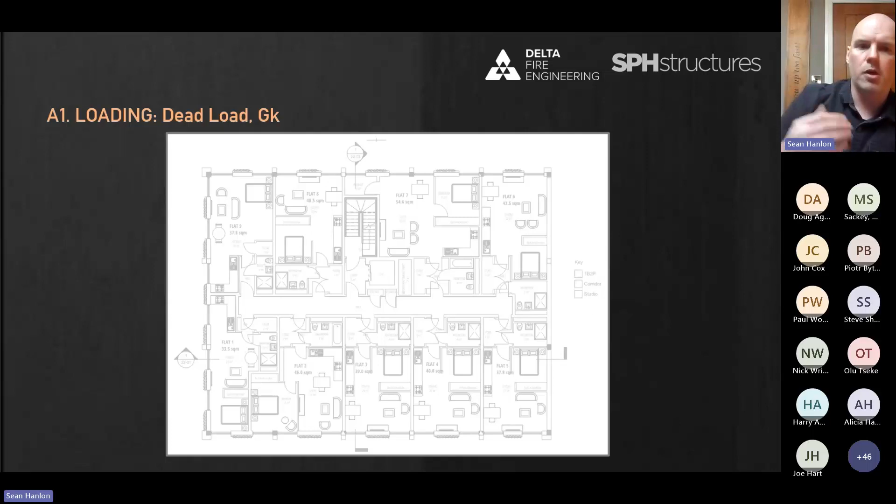And when we talk about scheme design, it's this. Doing that exercise will get firmed up in stage 3. So if I wanted to go to frame structure now, I'd tell the architect, you know what, steel is quite cheap right now. We should push a steel frame right now. I need that column there. Can we make that tweak? Otherwise it works well. We get that set, and that's all your main members set, they don't move. And then that should feed you into stage 4, technical design, and you start detailing it all up. But once that's set, then you do your build-ups.

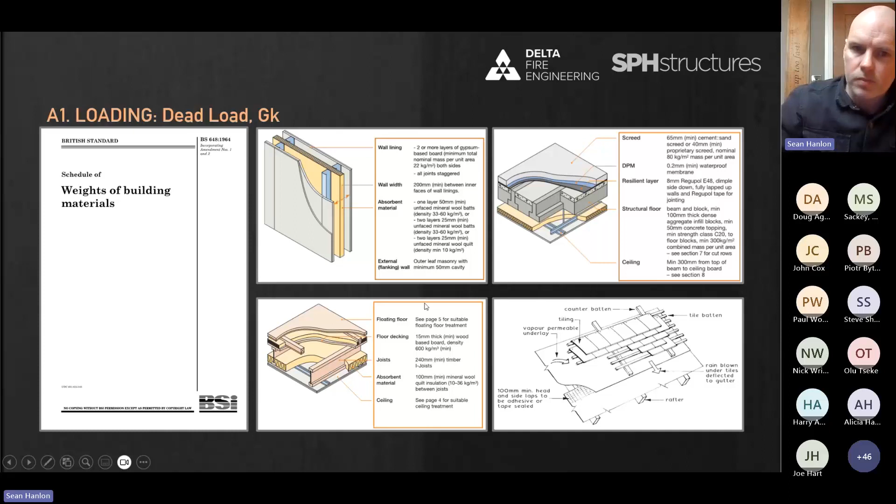Now, back in the 60s, the British Standards Institution very kindly went round and weighed everything. And so you have a whole standard full of weight of plasterboard, weight of copper pipes, weight of slate tiles, weight of clay tiles, and everything in between. And these 3 images are taken from the Robust Handbook, which a lot of architects use, and these are replicated normally as 2D build-ups and drawings. And we're basically going through and putting the weight of everything. We count everything up, and even on the roof, we're working out the weight of tiles, battens, and the rafters below. And we do this in order to do a load takedown through the building.

When it comes to the imposed load, we dip back into the Eurocode and we say, right, Eurocode 1, actions on structures. This talks about density, self-weight, and imposed loads for buildings. There are some values you can take for the self-weight of materials in this code as well, but that one's much more comprehensive. Never really use that for the self-weight so much. And then the imposed load, there's categories depending on the use of your building. So residential would be classed as A, fairly low. These are the loads that they recommend to take.

And then, so A is all residential, fairly low loads. And then as you increase in the usage of the buildings, the loads increase that you have to work to. So B are all offices, and there's a difference between the load you take on the ground floor and the office space above that. C are areas where people may congregate. So this is stairs, corridors, anything like that.

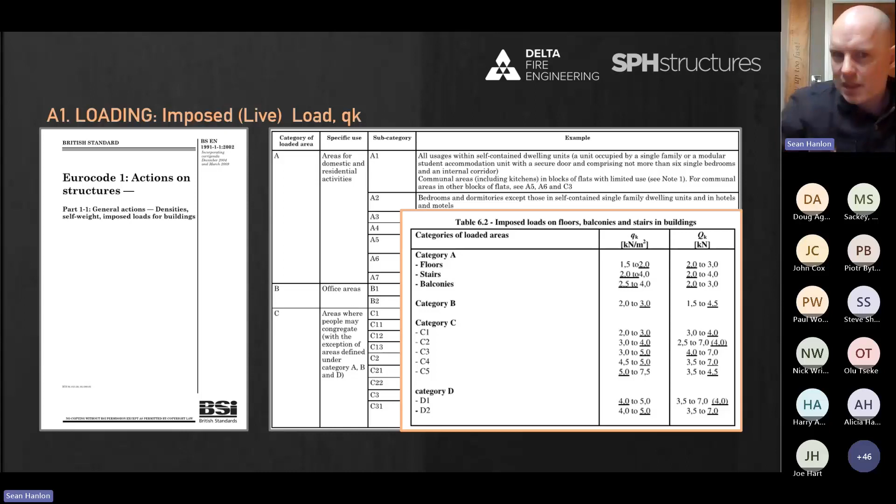We include allowances for wheelchairs, electric buggies, all those loadings as well. D would be shopping. E is storage. F and G are lightweight and heavyweight vehicles, and then H takes you up to the roof. And then there's nothing in there about plant loading, so you have to make another allowance on that. You speak to the M&E guys, see what the plant is, and you go through that. So this is us building up our loading.

We call this characteristic load. Characteristic loads are denoted by K. It means there's no factor of safety applied to them. This is the load as it is. You build it, you stick it on the scale, you should be getting somewhere close to these figures. Then you've got your design load, which is everything denoted with a D. This is really important in our calculations because we add the factor of safety on. So this would essentially be our ULS, ultimate limit states, and this would be our SLS, serviceability limit states. We use these loads for that, and we use these loads for design.

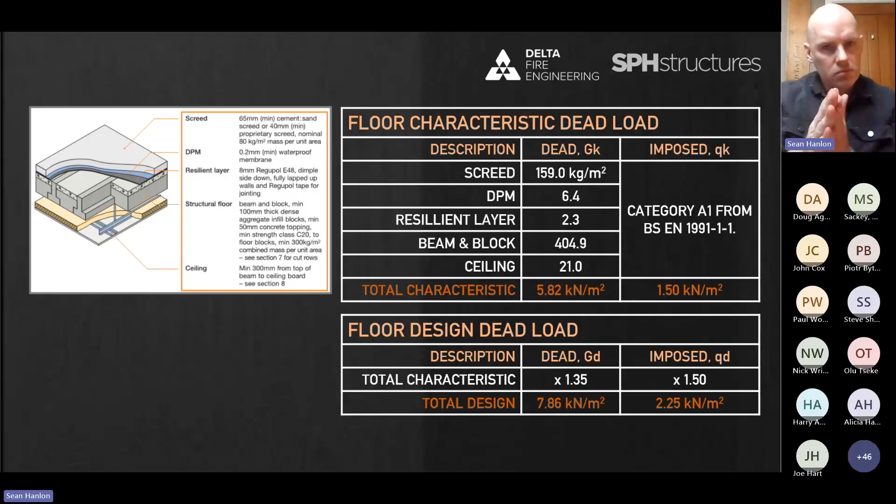Now, your K and D, so if I'm picking up another set of calculations from an engineer, this is the first thing I'm looking at. I'm checking what loads you use, because it's really easy to be conservative on this. Now, you can be a little bit out either way. It's better to be out if you're slightly over. So if you allow a slightly heavier load, then you are slightly over engineering it, okay? And over engineering means I think the structure's heavier than what it actually is, but I've designed for that. It's not going to move, all going to work fine, no problem.

Obviously, you want to get this as accurate as you can. We strip it right down, we get it very accurately. So if you over engineer it, that will be a 6 or a 7. You don't really want to go up that far. People might take a 6 rather than 5.82, for instance. But then if you under engineer it, if you get any one of these wrong, and I've seen that equally on some build-ups, then you're coming at 5.5, 5, 4.5 maybe. And these are silly mistakes, but silly mistakes here can impact you every step of the way throughout the rest of our calculations. So this is the first thing you need to get right.

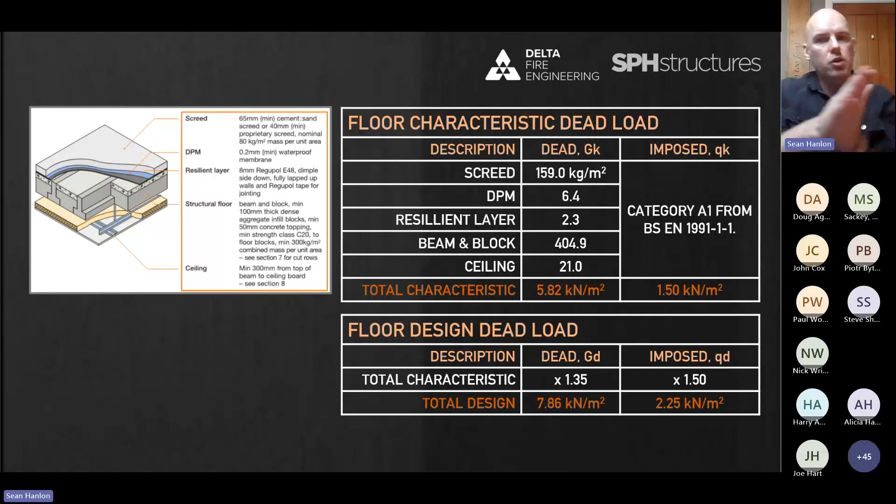And if you under engineer, then you're basically thinking, unwittingly, your building's lighter than it is. So things are going to move more than you think they are. Things are going to work harder than you think they do. And that's what you don't want. It's fine being on the over engineering side. No harm done. It might cost a little bit more here and there. Usually doesn't, but you definitely don't want to be on the under side of it. So this is really critical from that point of view.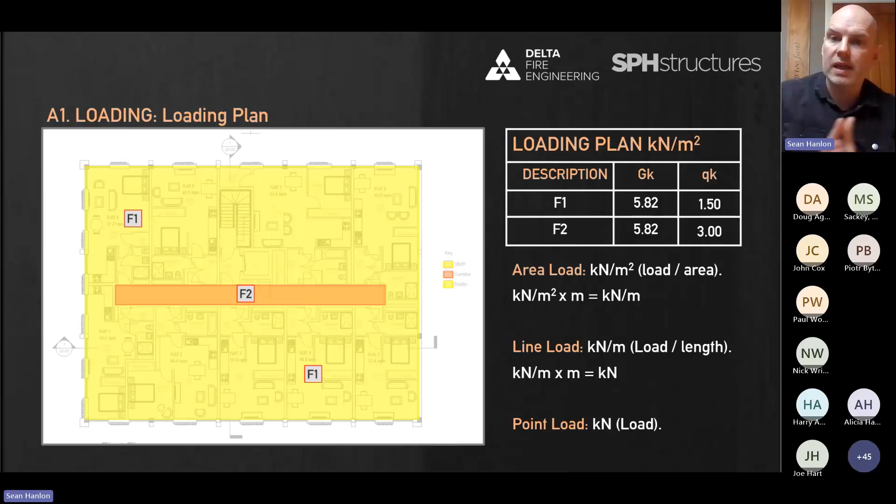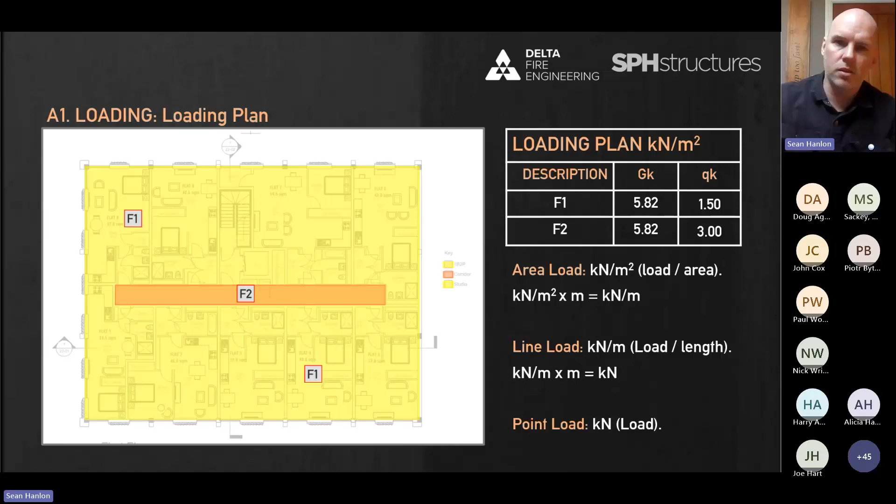And for us, that's how we differentiate between how certain elements work and how the load is redistributed around the structure. So your area load is the load per meter square. You times that value by a unit length, and you get a line load. That line load is a length acting on a beam or a wall, and then the point load is the reactions from that. That's best summed in this diagram.

So if I'm doing a load takedown and I'm working out how much load is in the building and where it all goes, I'm looking at my area load. And I'm saying, right, I'm going to span my floor from this wall to that wall. I'm going to assume half the load goes into this wall, half the load goes into that wall. That distance times the area load gives me a line load. That line load I can apply at the top of the wall, and I can now design my wall.

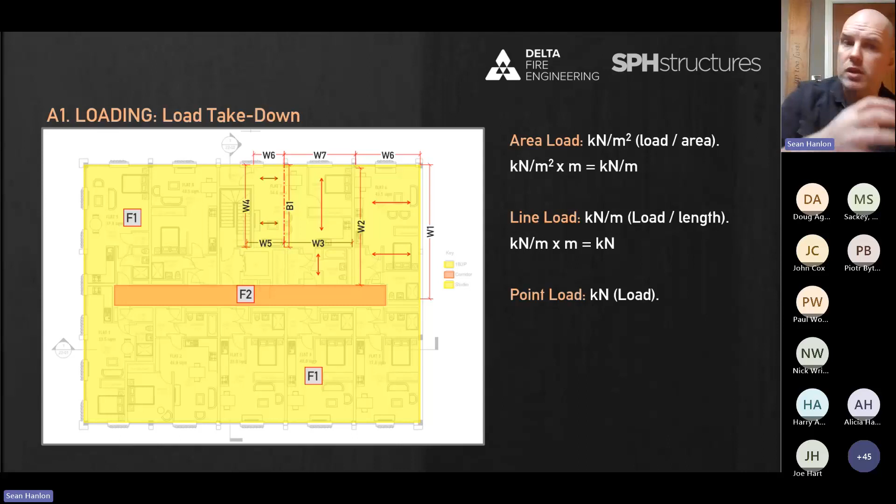Or if I'm over here, I can take half that floor load, maybe a little bit of this floor load because it's spanning that way, and then I can take that beam. I know the line load on that beam now, and now I can design that beam. The reactions of that beam sitting on this wall and this wall are what we call point loads. So concentrated loads that we have to chase down the structure.

Now, that basically brings us back to this diagram. We've got our area loads, we're converting them into line loads to do our floors, and then where we hit somewhere like a transfer in here, then we're talking a beam or something similar. So I might have a beam spanning from here to here, for instance, and that might give me a point load reaction there and a point load reaction there. And that's, in a nutshell, what we do. We chase all the load down, we make sure everything works safely.

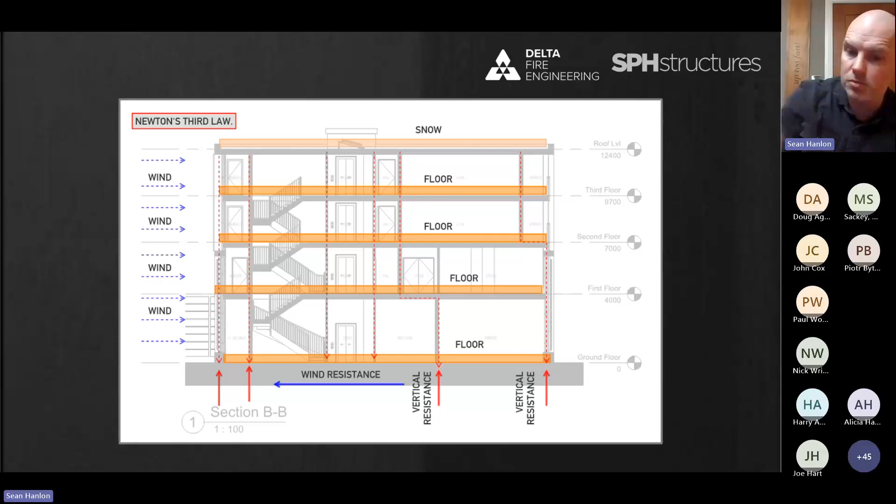Sliding, the whole building just shifts. So we have to look at the interfaces between all the floors and the walls to make sure we have enough, because your wind will accumulate down. Wind hits here, goes on the structure. Wind hits here, goes on the structure. By the time you get down to the ground floor, the interface between the ground floor and the foundations, all this wind load is going to be resisted by that connection down there.

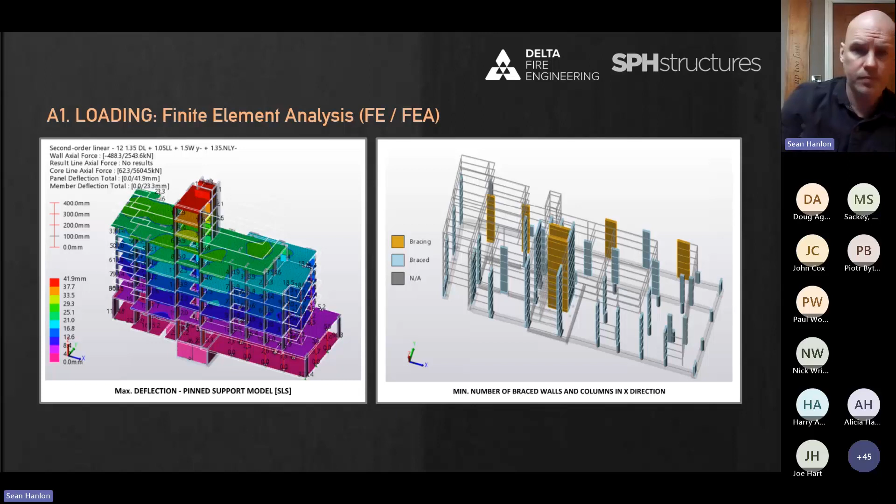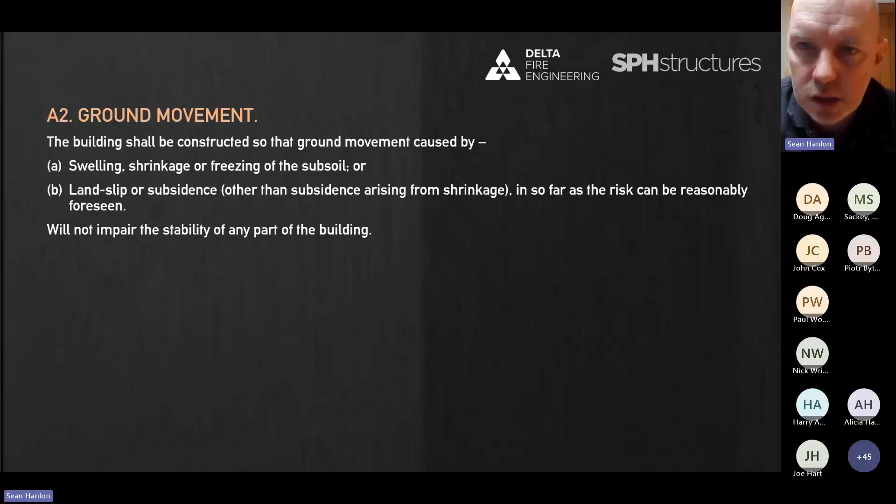Leads us into A2 ground movement. The building shall be constructed so that ground movement caused by A, swelling, shrinkage, or freezing of the subsoil, or B, landslip or subsidence, other than subsidence arising from shrinkage, insofar as the risk can be reasonably foreseen, will not impair the stability of any part of the building.

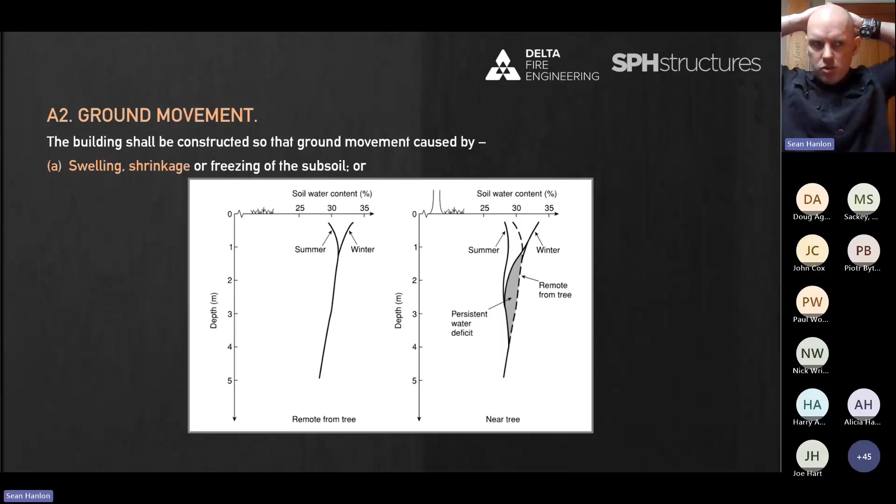Right, I'm going to break these down into two bits. Now, I'm going to deal with swelling and shrinkage to start with. Geotech guys might not like me for this, but basically there's two types of ground. You've got your clays, and then you've got your sands and gravels, and then you've got everything in between when they all mix it up.

Your clays, which is what half of London's built on, will shrink and swell depending on the moisture content within the clay. So when we talk about shrinkage and swelling, we have that consideration. Now, where there's no trees about, during summer and winter there might be, I don't know, a 3 or 4% moisture content change within the soil. And you are going to see that change mostly anywhere between 450 down to a metre-ish kind of range. That's why whenever you see foundations in a clay environment, we always take them down to about a metre for this reason.

We don't want that movement during the summer and winter months, because in 1976 there was a big heat wave through the southeast, and all the buildings, all the homeowners, everything just started cracking. All the insurance companies then went, whoa, we can't keep paying out this. Where's all this come from? What's a crack? What's structural, what's not? And then the BRE did a big research paper on it, and they came out with crack classifications. What's aesthetic? What's serviceability? What's structural? And then they came out with the recommendations saying, right, you're all in clay. Clay shrinks, it moves, it swells. Take them down to here.

And then clay itself will have different shrinkage and swelling properties called plasticity. So high plasticity, take it down to a meter. You can go 0.9 meters for medium. You can go 0.75 meters for low. The extra 250 mil of concrete is not going to make a big deal to your building. So most engineers will take it down to a meter. You know you're good then. You don't have to be on site checking the contractor doesn't pinch an inch here and there.

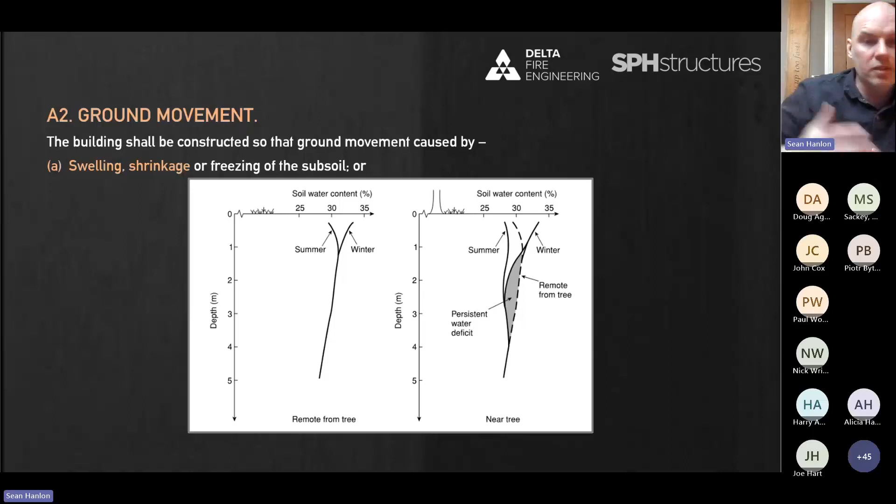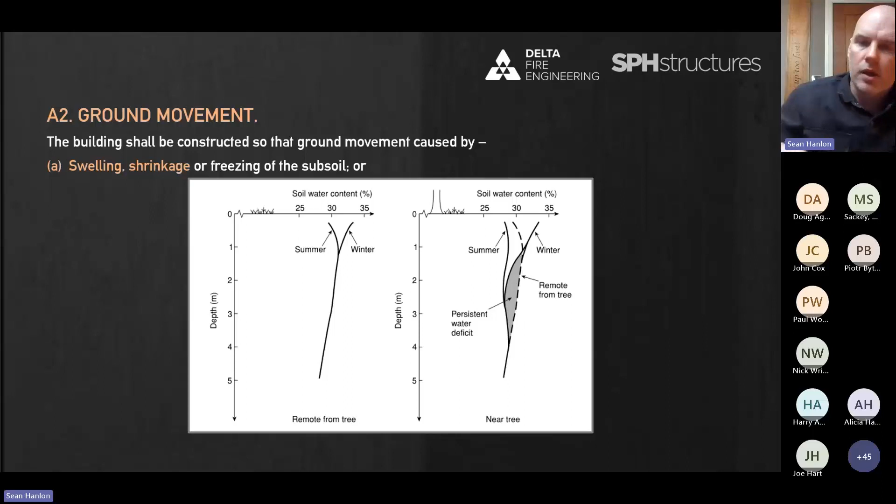They need to take you down to about 2.5 meters here to mitigate the risk of any movement of the foundations. So that's a lot of concrete going in the ground. And when you're going more than, I think, 1.5 to 2 meters-ish, you're into temporary works, in that you can't dig a hole that deep and expect the soil not to fall in on itself. So contractors need to be especially careful. You need to be careful how much concrete you put in the ground. And this may be the tipping point where you go, right, I'm going to put piles in rather than mass concrete, and you look at alternatives to foundation design. But that's shrinkage and swelling, and some of the considerations we have to do.

Freezing of the subsoil. Short answer, anything within 450 mil from the surface level is susceptible to frost heave. So frost heave, your top 450, mainly top 400, let's call it, if your soil freezes during winter, once that starts thawing out, anything you've got bearing in that zone is going to move. It's going to crack. It's going to move everything above it. This is more applicable for garden walls, garages, sheds or outhouses, anything that isn't heavy and doesn't need a lot of load. People dig a small hole, stick it in, and off you go. It's also applicable to Victorian townhouses in Bath and London, and half of London is built on what we call corbelled foundations.

So these are corbel foundations. It's bricks that step out 1 or 2 courses, and I don't think it's a coincidence that these things are always around about 450, 600 mil below ground level. Now, bearing in mind the Victorian era took you up to 1900 before the Edwardian era kicked in. And the Edwardians, they basically straightened everything up and made it work better. But the Victorians, I think they took masonry to its limit.

They figured out that you could build a 3-story masonry house on these teeny tiny foundations right at the bottom, and it wouldn't move. They knew if they had to go to 4 stories, they needed to dig down, and they needed to offset that load into the ground, and then it wouldn't move. And that's how they get a 4-story. That's why you see so many lower ground floors in Victorian properties.

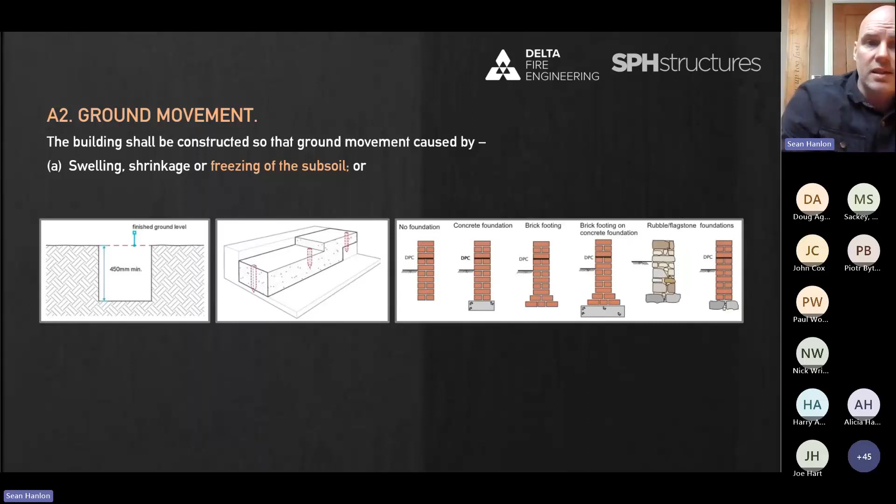I think it's a beautiful bit of engineering, and a lot of the practices that the Victorians used back then, we still use today. We picked up a book recently that was about 150 years old, and the equations and the recommendations in there are still the same as we apply today. There's not much change in terms of how we approach engineering, but I do like the Victorians for this, and they did lots of other great stuff that is still applicable in building regulations today as well.

Ground movement, landslip and subsidence. What you're seeing now is subsidence. So subsidence is basically a weak spot in the ground. And a weak spot in the ground could be caused by anything. It could be old mining or a tunnel in the ground that's collapsed. Most typically, you'll see it as a leak in drainage or a rainwater pipe that's leaking close to the building. That causes a soft spot in the ground, and then the building wants to slowly start to fall into it. And that's when you start seeing crack patterns within the building.

And cracks are all cracks. I like them. They tell you where the problem is, especially in masonry. Masonry is terrible in tension. Masonry is great in compression, but it can't handle tension. So if you got a diagonal crack, it's either something pulling it from this side or something pulling it from that side, and it points to where the problem is. And when it points to where the problem is, it's usually a tree or a drainage run or something similar.

And if there's nothing obvious there, then you need to start looking further afield and go, okay, what else do we have here? Is there a drainage run running through that we don't know about? Are there any underground mines that we don't know about? So this is more applicable to existing buildings. In new build now, you would do a soil investigation. We know what's going on in the ground conditions.

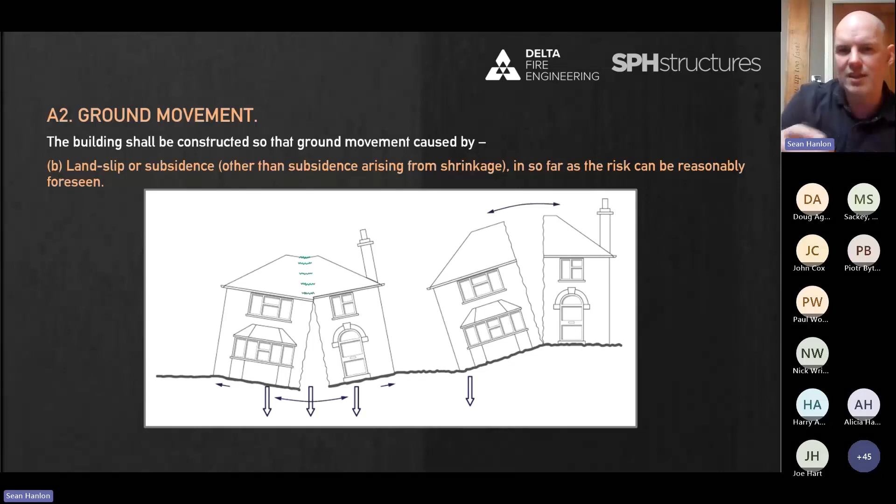If we're coming on to what we call a brownfield site, which has already been used, we'll do boreholes. And we can do boreholes 5, 10, 20 meters deep, maybe more, depending on what the structure is that we're proposing to build. And we'll have an idea of how deep we need to go with our investigation, depending on the type of structure. And we'll roughly know, okay, it's going to be piles, or it's going to be shallow foundations, and we'll suit the soil investigation to what we need.

Landslip is removal of a portion of the soil from underneath the building. So you're basically undermining the building and it leaves the building exposed. And this is more applicable on sloping sites, I would say. So we do actually design for this in new construction.

It's called a slip plane. So you take those properties of the soil and you look at how rigid it is, and whether that whole section where the building is wants to slip and move, and we call that a slip circle. So we design for that as well. You don't see that often, but, let's say, with flash floods, it's more applicable and there's a danger of that.

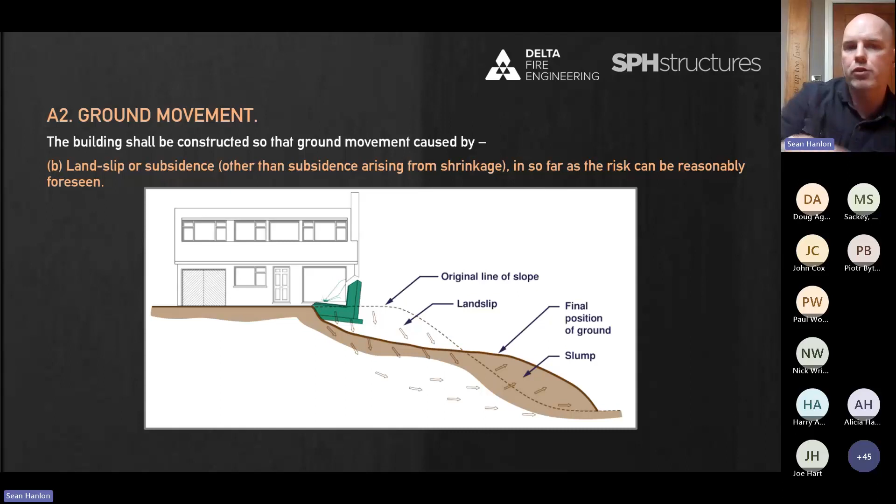But I think if you're in that region where you have history of that, you would allow for that risk and you would design from the off anyway. And then that brings us on to A3, disproportionate collapse, which I'm going to just read: the building shall be constructed so that in the event of an accident, the building will not suffer collapse to an extent disproportionate to the cause.

Now, I haven't put any further info up here on my slides, and this is my last slide, because, as I think most people will know, this is Ronan Point. This was a 22-story building that partially collapsed on May 16th, 1968. Ivy Hodge woke up one morning, lit a match for a kettle, and blew out 2 corner walls from her building. She was on the 18th floor. It took down 4 stories above her and 12 stories below.

I remember I spoke to Joe about this a while back, because this changed our building regulations for structure, this brought in disproportionate collapse. When we talk about disproportionate, the cause of collapse, a gas explosion in someone's dwelling, should not have caused this extent of collapse. So we call that disproportionate. And it massively changed our regulations and how we approach buildings. Joe was of the opinion that it should have had a bigger effect on fire than what it did. It also should have changed how you look at fire as well.

But the impact for us is that we have to design buildings so they are resistant to disproportionate collapse. Now, in concrete buildings, the steel elements within them, like the rebar within the concrete, are great in tension. So even if you do remove a column, remove a wall, then all that tension, providing it's connected properly or lapped properly, is great at redistributing.

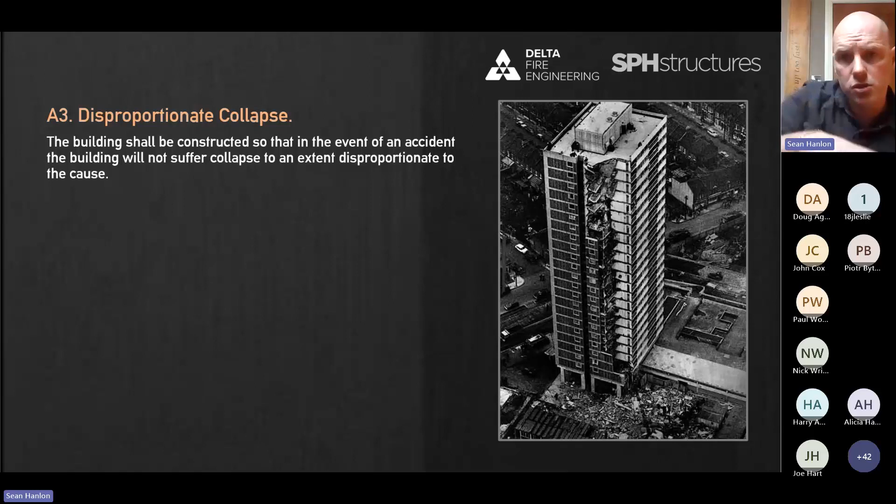And it sounds like, this is just me guessing, but it sounds like that was fatigue. The building's moving in the wind, it's opening up cracks at the higher level. I think that was probably more susceptible to wind loading than anything else. And that's probably why they need strengthening works in. But again, that's looking at form of construction, how it's built, where the risk is. And that should tie us into this afternoon session. I hope that helps.